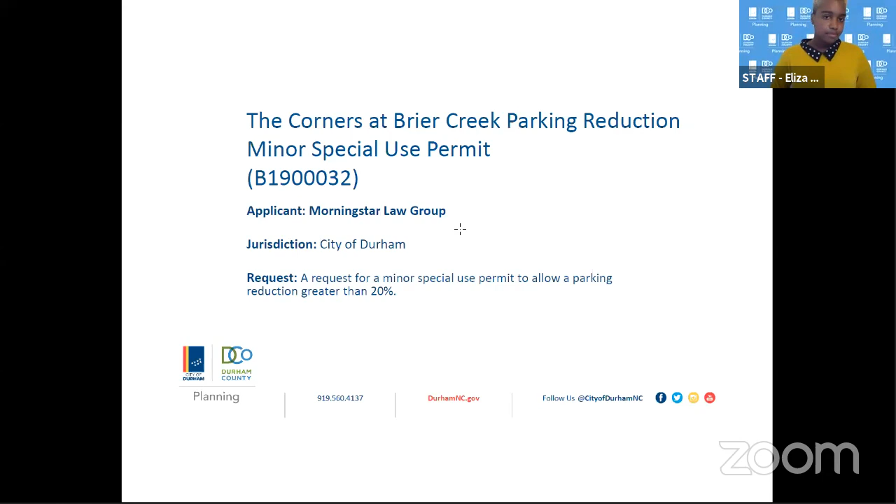Eliza Monroe representing the Planning Department here. Case B19-00032 is a minor special use permit request to permit a parking reduction greater than 20%. The applicant is Morningstar Law Group. The subject site is located at 1020 Andrews Chapel Road in Durham. The case area is highlighted in red.

The site is within the suburban tier, zoned planned development residential or PDR, located within the Falls of Neuse Jordan Lake Protected Area, Watershed Protection Overlay District, and the Major Transportation Corridor I-40 Overlay District. It is also within the city's jurisdiction and is on the screen there in red. The site area is currently vacant. The applicant is proposing a residential development there, primarily consisting of apartment units.

Per Unified Development Ordinance Section 10.3.1B.10, except for within the compact neighborhood tier, reductions of more than 20% of required motor vehicle parking shall require the approval of a minor special use permit. The site is currently vacant, as I mentioned before. A site plan, which was in your packet as attachment 4, is currently under review and proposes 298 apartment units, a clubhouse, and pool. The uses were approved with the development plan in 2012, which is attachment 5 in your packet. The Unified Development Ordinance would require the site to have 658 spaces.

That would be 2 spaces per the 298 units, plus one space per 100 square feet of the clubhouse. The applicant is requesting a reduction from those 658 spaces for a total of 527 motor vehicle spaces. UDO Section 3.9.8A and B establishes 4 findings and 13 review factors that the applicant must meet in order for the board to grant a use permit. These findings and review factors are identified in the staff report, and the applicant's responses are identified within the application, both of which are within your packet, and staff will be available for any questions as needed during the hearing process.

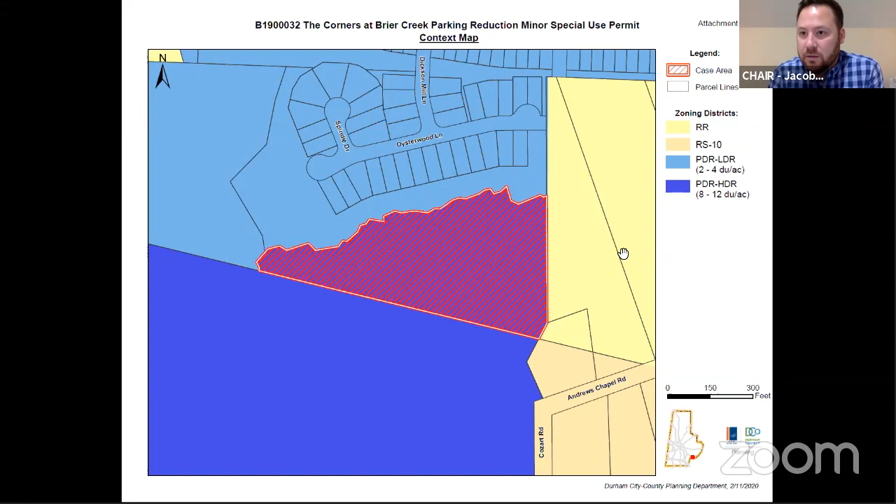Any other questions for staff, for Eliza? All right. I would usually say would the applicant come forward, but before the applicant starts, I want to administer the oath to everyone who will be speaking for this case. So who is the applicant? Is it Morningstar? Morningstar Law Group, and I believe they do have some additional people on their team today that will also be needing to take that oath. Okay. Neil, I think I saw you on the roster. Are you there?

Patrick, right? Neil, Patrick. I can hear some whispers, but I'm not sure if that's us or not. You've got Mike, Tonti, and Chad Boyette. We're like, I can wave.

All righty. Okay, well, this is going to be for all the speakers for this case. Do you solemnly swear or affirm that your testimony and evidence shall be the truth, the whole truth, and nothing but the truth? I do. I do. Thank you. All right, well, you may proceed if you'd like.

Chair, this is Krista Kugro with the City Attorney's Office. We also need to get verbal consent of the participants to the remote meeting format. I wrote that on the agenda here. I forgot to do that. So does the applicant consent to this remote meeting? Yes. Yes. Yes. Thank you. Well, please continue or start.

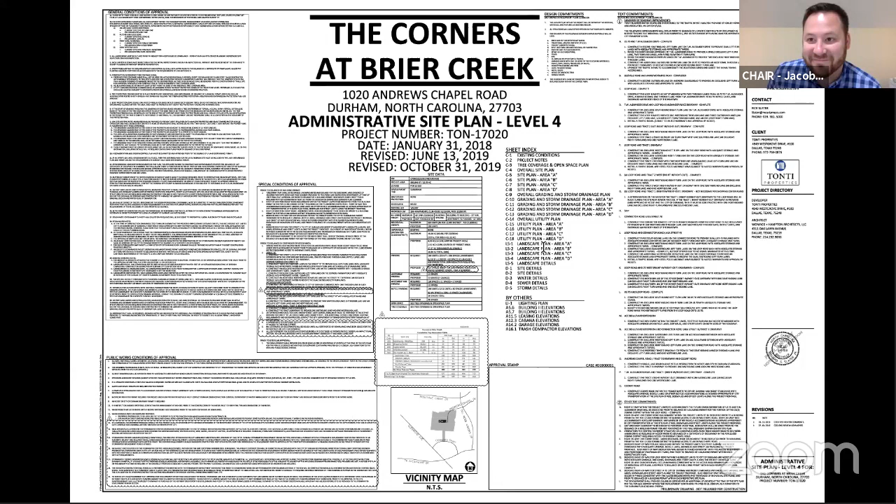Chair, this is Krista Kugro, City Attorney's Office. I believe Mr. Ghosh was not on the call when you administered the oath, and I'm not sure about the consent. So if we could just make sure that that was done. Thank you. All right. Mr. Ghosh, do you solemnly swear or affirm that your testimony and evidence shall be the truth, the whole truth, and nothing but the truth? I do. And do you consent to this remote meeting platform? Yes, I do. All right. Thank you. You can start.

Thank you, Chair Rogers and members of the Board of Adjustment. I am Neil Ghosh, an attorney at the Morningstar Law Group at 112 West Main Street in Durham. I am representing the owners of the property located at 1020 Andrews Chapel Road, and we will present evidence in support of the application for a parking reduction. The permit relates only to the parking reduction, not the proposed use itself, which is generally permitted at this location. So the evidence will be focused upon the impact of the reduction and not the more general aspects of the use. As staff mentioned, we are requesting a parking reduction of around 20%.

We believe the requested permit is warranted for the reasons which will be shown by the evidence that we will present to you today. And at this time, I would ask that all materials referred to or used by the witnesses, including the staff report and all of its exhibits, be entered into the record, and that judicial notice be taken with regard to the contents of the UDO, the comprehensive plan, and other adopted plans of the city and county of Durham. So noted. Thank you. In addition to those, we have some exhibits which we submitted to staff earlier. They are the reports of our expert witnesses.

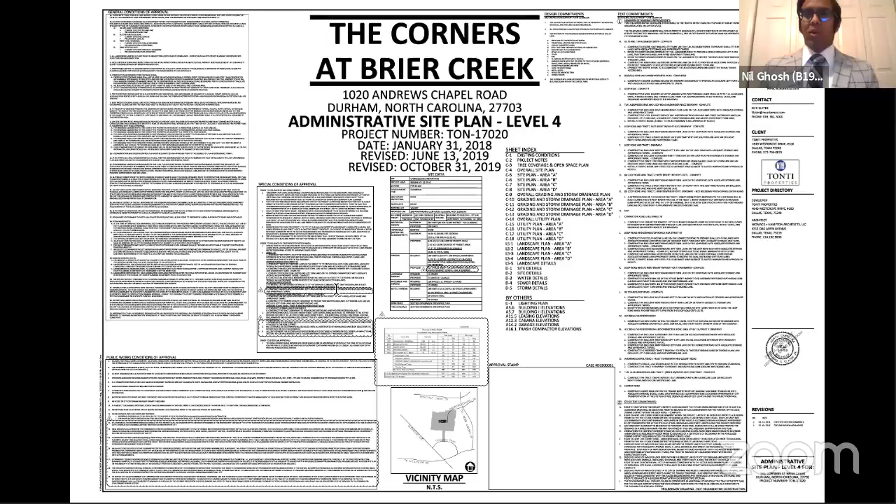One is from Mr. Jarvis Martin, who we are tendering as an expert witness in the field of real estate appraisal. He is a certified real estate appraiser with Stewart Martin McCoy. And the other report is a parking study, which was done by Mr. Earl Llewellyn at Kimley Horn and Associates, and he is a traffic engineer. I just wanted to make sure that those things would be entered into evidence and that those two witnesses would be accepted as expert witnesses capable of giving opinion testimony consistent with the requirement laid out in General Statute 160A-393(k). All right. You can proceed.

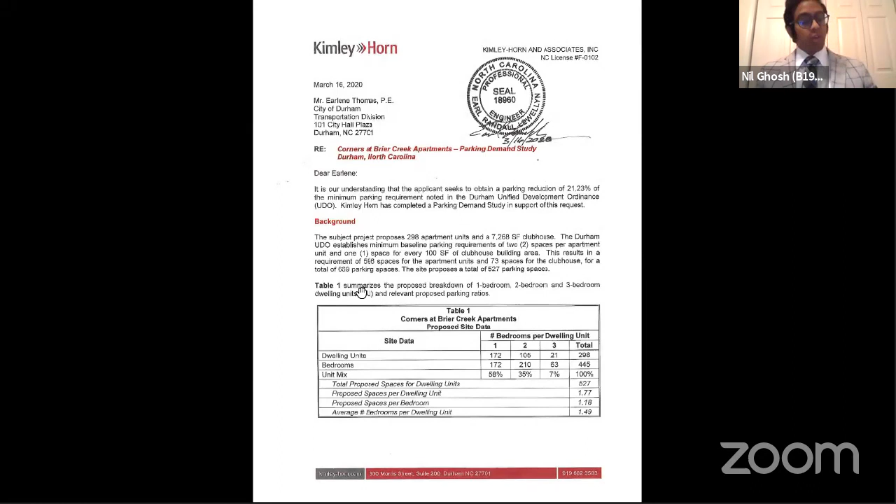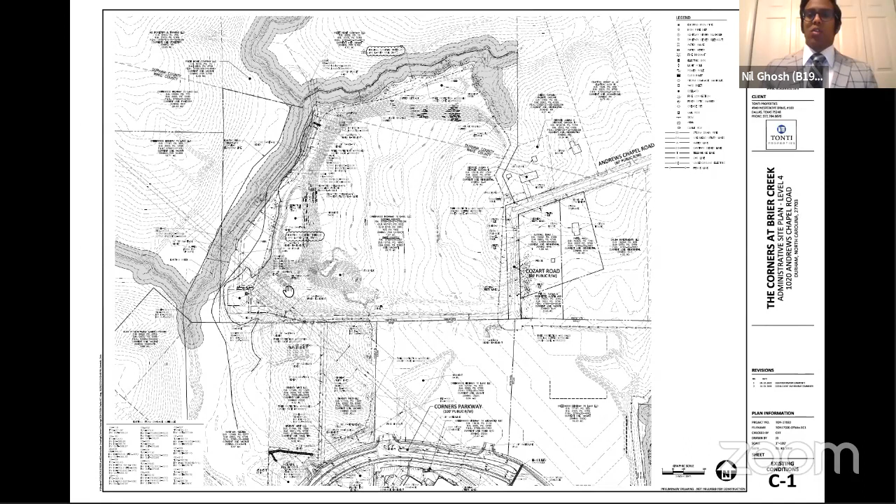Yes. Okay. So for me, the easiest way to describe the location is that it is behind the Harris Teeter at the corner of TW Alexander and Highway 70. The property is very much part of Brier Creek. There will be direct vehicular access to the Harris Teeter Shopping Center from the site. The development plan for this area included this use. It was approved in 2012, which I believe Eliza mentioned earlier. We're excited to see this section of the project finally being built out, and we're requesting your approval of a minor special use permit for a parking reduction for that purpose. Our first witness will be Mr. Earl Llewellyn.

Good morning, everyone. I am Earl Llewellyn, traffic engineer with Kimley Horn and Associates at 300 Morris Street in Durham. I routinely conduct traffic impact and parking analyses like these, as well as overseeing roadway designs, traffic signal designs, and the like. I graduated from NC State with a BS in civil engineering. I'm a registered professional engineer in North Carolina and have worked in the traffic engineering field for over 30 years.

As Neil said, I conducted the parking study for the project, which uses current industry standards, parking methodologies, et cetera. And that study has been entered into the record by Neil. My report assumes the development will consist of 298 mid-rise apartment units. That's basically between 3 and 10 stories, as well as a clubhouse of 7,268 square feet. Since completion of the study, the clubhouse has reduced to 6,218 square feet.

So based on that site plan, the UDO would require 658 parking spaces. The applicant is providing 527, which is approximately a 20% reduction. Based on information provided by the applicant, my report examines parking demand using 2 independent variables. Those are one, the number of units, and number two, the total number of bedrooms proposed.

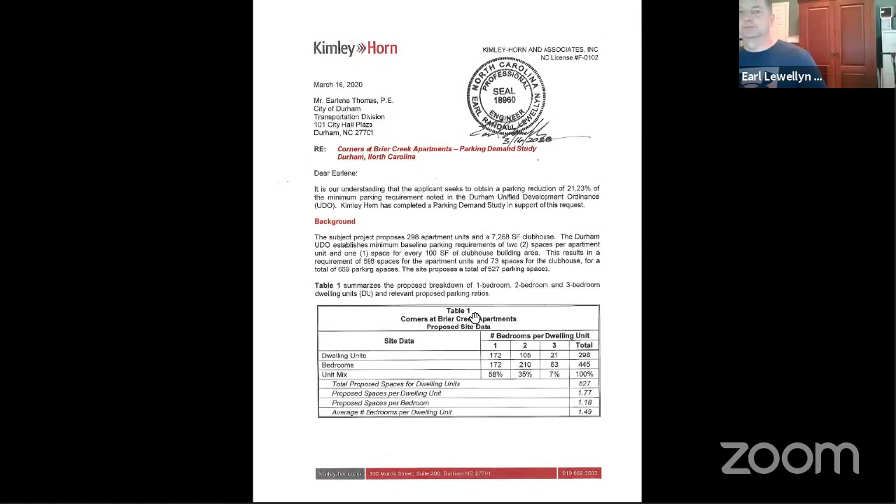Any other questions for Mr. Llewellyn? Thank you, sir. Thank you all. Thank you, Earl, and our next witness will be Mr. Jarvis Martin. Good morning, Mr. Rogers and members of the Board of Adjustment.

My name is Jarvis Martin. I'm a state certified general appraiser. I have 2 degrees from North Carolina Central University in business, and I've been in the real estate business here in Durham for over 40 years. I'll be glad to answer any other questions that you may have about my qualifications or resume. My firm was requested by the applicant to look at this property to see if there would be any adverse impact from this parking reduction on the surrounding or nearby properties.

Since this development would be adjacent to an existing shopping center, what we did was to look at 3 apartment complexes that had been approved with reduced parking that were in close proximity to commercial facilities, as well as look at shopping center facilities that have not been impacted by apartments with reduced parking requirements.

With commercial property, the best way to gauge value is by looking at the rental rates and vacancy. In the 3 shopping centers that we looked at that were not impacted by close by apartments with reduced parking, we determined that the rental rate for their space ranged from $25 up to $36.50 per square foot. When we looked at centers that were in close proximity to the 3 developments that did have some reduction in parking, the rental rates in those centers also ranged from $25 up to $32 per square foot.

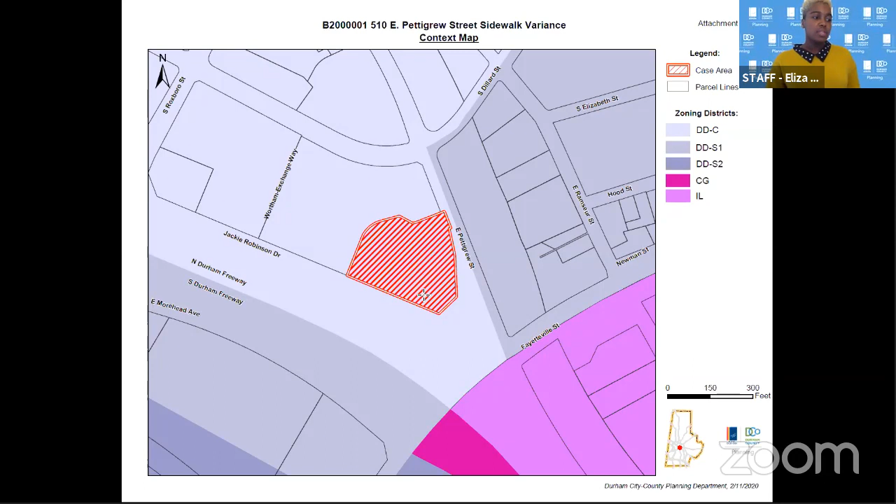Case B2000001 is a request for a variance from the sidewalk requirements of the Downtown Design Core Zoning District. The applicant is Cline Design Associates. The subject site is located at 510 East Pettigrew Street. The case area is highlighted on the screen in red. This site, as I mentioned before, is in the downtown tier, zoned DDC, and is within the City of Durham's jurisdiction. The site is currently vacant.

Per UDO section 16.4.2A.1, within this DDC zoning district, sidewalks shall be provided from the building face to the back of curb. For this site and the approved location of the building, that will result in sidewalk widths within the range of 27 to 34 feet wide along Wooden Exchange Lane and a roughly 40-foot sidewalk along East Pettigrew Street. The site is currently vacant, but a site plan was approved in October of 2019, case D1900079, to permit the construction of the apartments here.

The applicant is requesting a variance from section 16.4.2A.1 of the UDO to instead permit a 12-foot sidewalk around the site at the back of curb to contribute to a visual environment downtown. Additional landscaping would be provided between the building and the sidewalk. UDO section 3.14.8 establishes 4 findings that the applicant must make in order for the board to grant a variance. These findings are identified in the staff report, and the applicant's responses to the findings are identified in the application, which are both within the packet that you all received. Staff will be available for any questions as needed during the hearing process.

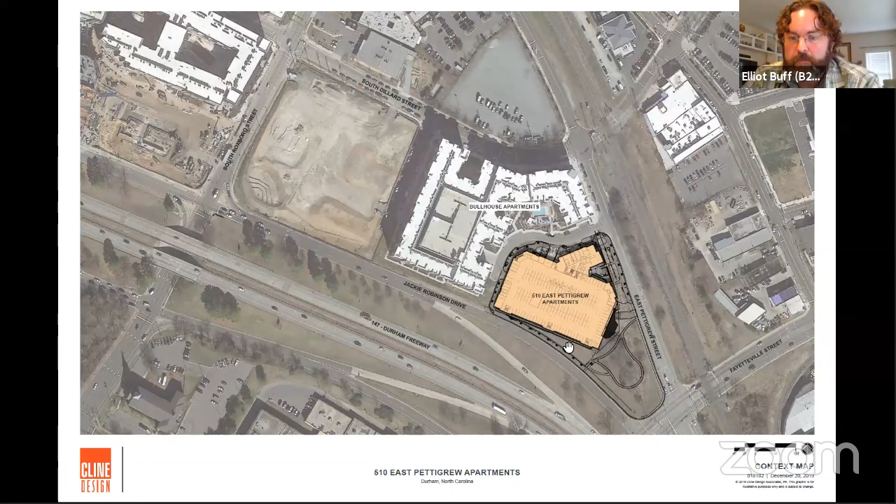One more question, sir. Where is the front entrance of the building? The front entrance is really along East Pettigrew Street. Liza, if you could flip to probably the second exhibit of the proposed condition, or even the code condition, that's fine as well. The corner of Wooden Exchange Lane and East Pettigrew is the front corner of the building. And there's a main entry, sort of where you see that rectangular planter near the front corner of the building. That's really the front door. Okay.

Thank you. Any other questions for the applicant? Mr. Buff, would you like all of your written and oral testimony to be part of the record? I assume normally, yes, I would like that. In exhibits, and it's just something we have to put on the record. I appreciate that. Any other questions for the applicant? All right. Eliza, you went, there you go.

Hi, this is Rexless. Mr. Buff, the trees, are there going to be any planters around these trees or kind of obstructions? Is the sidewalk going to be flush so people aren't tripping over these areas? The sidewalk is a continuous flush sidewalk, and the tree plantings are flush tree grate pavers with bricks on top too. So you have a continuous flush surface there at the sidewalk, and that's a Durham approved standard streetscape. Great, thank you.

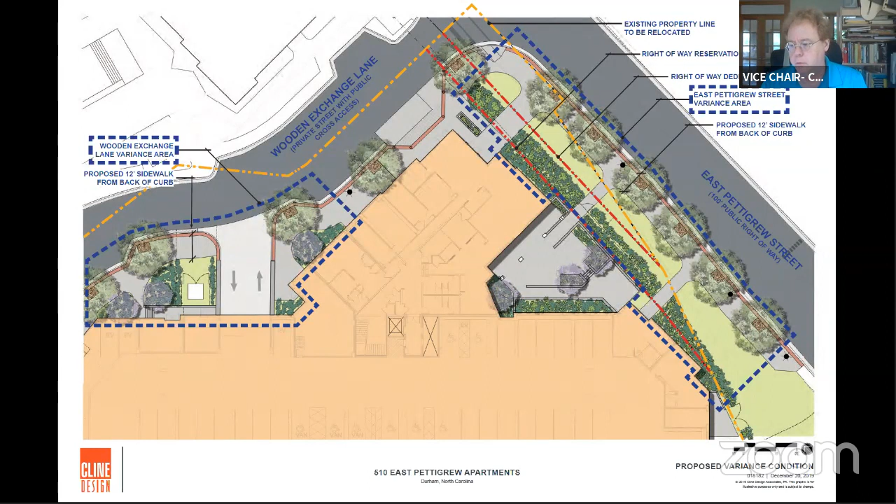Mr. Chair, this is Meadows. I have a question. I assume that the city will be maintaining the area that's inside the dedicated right-of-way, or there's some sort of agreement between the city and the applicant about maintenance of the vegetation in the right-of-way. Wasn't sure about that. Good question. Eliza, do you have an answer, or does the applicant?

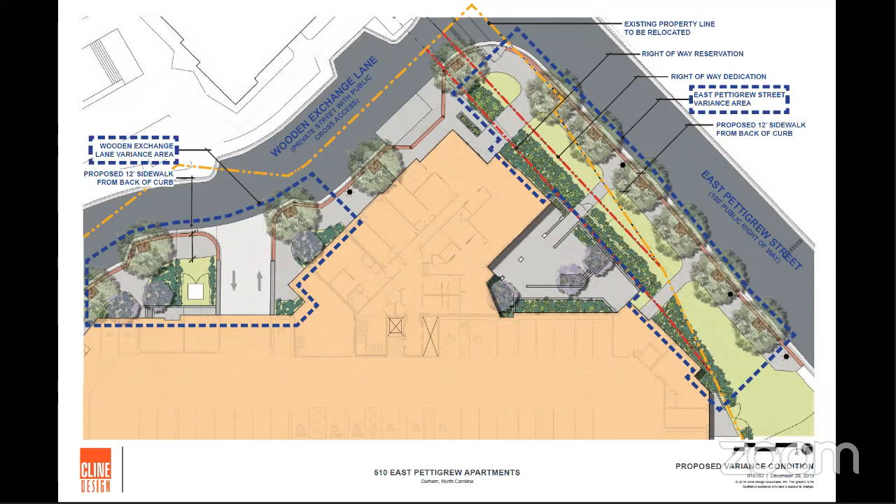I do not have an answer at this time because this is not something that has been formally submitted to the city of Durham in terms of this request to change over. For the right-of-way maintenance, I do believe that is within our general services department, and I'm looking at Jessica and Bo to correct me if I'm wrong. I'm not aware at this time of any partnerships or agreements between us and Go Triangle for the area that is the right-of-way reservation. This is Jessica Dockery, Planning Department. The city does maintain the right-of-way. Thank you, Jessica.

Any other discussion? I kind of like the area with less impervious surfaces, such as this. Something a little more creative, I would think. So those are my thoughts. All right. Was anyone having a motion? Oops. I believe there was a raised hand by DeLacy. Oh, I'm sorry, Mr. Lacey.

You may be on mute. You are on mute. Hang on.

Okay. I agree with your joy at less impervious surface, but I was thinking about how crowded the sidewalks are when it comes down the street toward the ballpark and the DPAC, and how people just flood that whole sidewalk. And I was just musing as to whether they would continue to spill out on sidewalks further away than that, or are people no longer interested in walking that far? That was my only musing. It's not an objection, it's just a thought.

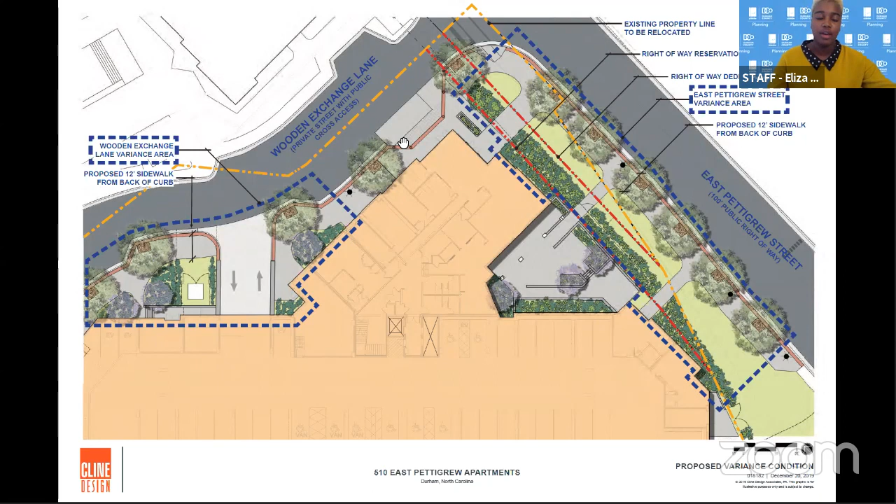Well, I was wondering, and I don't think I saw this, the number of units in this. Eliza, do you happen to know how many units are in this? I can pull up the exact site plan. Elliot, I might default to you here. The number of units wasn't a part of the variance request, so that information wasn't required. But I can pull it up very quickly. So let me go back on mute. And Elliot, if you have the number of units for the original site plan. I wish I did. I don't have that number in front of me. It's okay. And for me, all the number of units blur together anyway. But Eliza, if you do pull that up, just so we can formally acknowledge that.

But to acknowledge the sidewalk comment, I think our goal was to still provide a 12-foot sidewalk, which is consistent with Durham standards and with a very large, clear pedestrian pathway of 12-foot width. And that's 12 foot of paving with the tree planters along the streetscape edge, along the back of the curb. Those are still hardscaped tree planters with brick paving above. So you have a clear pedestrian route throughout that entire streetscape area.

All right. Any other comments, discussion among the board? All right. We're not getting a staff recommendation for this variance. Is there a motion? I'll do it. This is Meadows. Hold on. This is Jessica Dockery. I believe you're holding for that site plan number. Eliza was still trying to find that. Yes, and unfortunately, I'm not able to locate the SharePoint file for it, so I do apologize. I'm not able to pull up that exact number. Okay, again, like you said, it's not part of this variance, it was just a simple question, but I appreciate you looking. Mr. Meadows, I think you were.

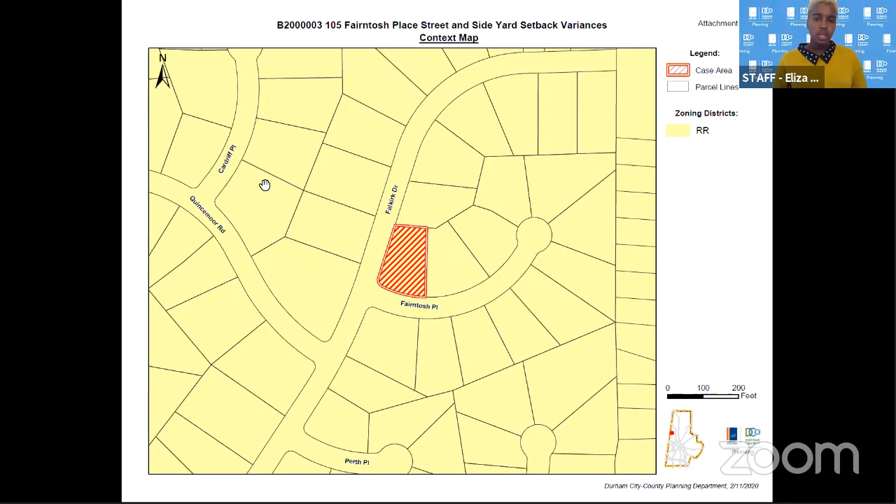Case B2000003 is a request for a variance from the required street and side yard setbacks in order to construct an addition onto an existing single family dwelling. The applicants and property owners are Kelly and Camille Drews. The subject site is located at 105 Fairntosh Place. The case site area is highlighted in red. The site is in the suburban tier, zoned residential rural, otherwise known as RR, located within the Eno River Protected Area Watershed Protection Overlay District and within the county's jurisdiction. The site area is currently a single family dwelling.

Per UDO section 6.2.1A.1, a 50-foot street and a minimum 12-foot side yard setback are required for a single family dwelling in the RR zoning district. The case area is a corner lot and thus has 2 street yards, one on Fairntosh Place and one on Falkirk Drive.

The applicant is requesting a 12-foot variance from the street yard setback along the west side of the parcel in order to bring the existing structure into compliance with the current ordinance. The survey, which was attachment 4 within the packet and is on the screen here, illustrates that the existing dwelling is 38.6 feet from the property line, encroaching into that required street yard.

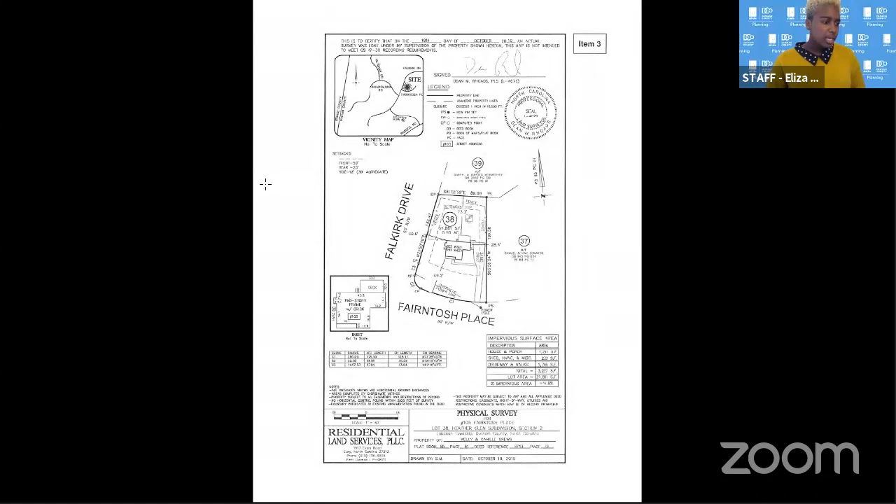The applicant is also requesting a variance from the required side yard setback for the addition of a garage, which is shown on attachment 1. As proposed, the addition would encroach into the required side yard setback and requires a variance from the Board of Adjustments for approval. UDO section 3.14.8 establishes the 4 findings that the applicant must make in order for the board to grant a variance.

These findings requiring approval are identified in the staff report, and the applicant's responses to these findings are identified in the application. Both were within the packet that you all received. Staff will be available for any questions as needed during the hearing process, and I will also be able to flip through the different documents here, which you should have gotten a copy of, but I'll also have here for the view. And I do believe someone does have their hand raised.

Mr. Meadows? Thank you. Eliza, would you show item 2 on the screen just for a moment, please? This is the one that you're referring to, right? That would be the one. Thank you. I just wanted to make sure that that was on the screen for a period of time. Thank you. And if there are no further questions for staff, I will allow Mr. Drews, or Mr. and Mrs. Drews, to speak. Are there any questions for staff before we continue? All right, with the applicant.

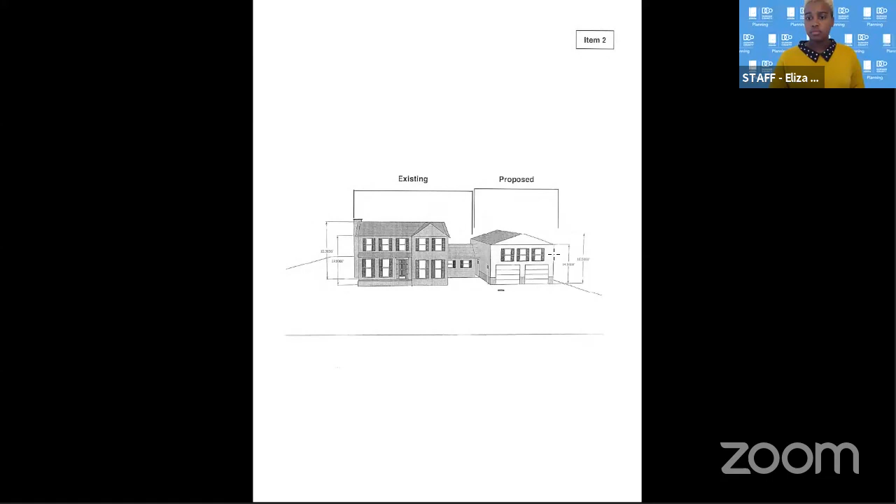Hi, I'm Kelly Drews. I'm one of the property owners along with my wife, and I'll be representing the 2 of us for today's meeting. As Eliza mentioned, essentially we're asking for 2 variances. One, Mr. Drews, for one moment, I appreciate you coming. I got to administer the oath and ask you a question. Do you solemnly swear or affirm that your testimony and evidence shall be the truth, the whole truth, and nothing but the truth? I do. And do you consent to using this remote platform? I do. Thank you. Please continue.

Sorry. So essentially we're asking for 2 variances, one of which is to bring our current structure into conformity. It was built in 1977 before any of these guidelines were established, and as such, we'd like to just make sure it's in conformity with the current guidelines. And then we'd like to request a variance from the setback requirements in order to build an attached garage. We're hoping to build a garage that's roughly 24 feet wide and would therefore be between 4 feet and roughly 1 foot from the property line, depending on where on the garage you're measuring.

And Mr. Drews, would you like all of your written and oral testimony to be part of the record? Yep, that's fine. Any questions for the applicant? Meadows has his hand raised. Chair Rogers. Mr. Meadows. Thank you, sir. Mr. Drews, I had a question for you about the roof of the proposed structure. If I read the site plans correctly, it looked like the wall of the structure was going to be about a foot or so from the lot line.

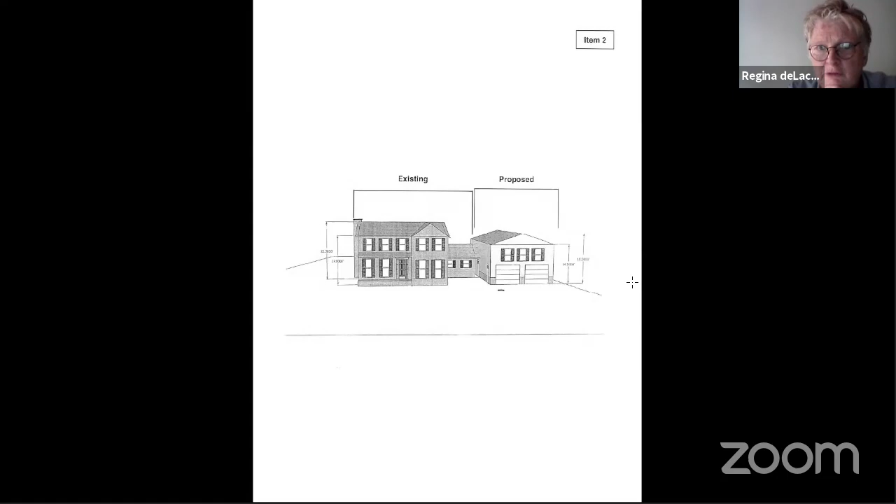Lacey? Mr. Lacey. Mr. Drews, have you been in communication about this project with your next door neighbor whose land you abut on the garage side? Yeah, we have actually. So that was the first person we talked to. We didn't want to create any bad blood. And they offered, in fact, to come and speak here, but we were told that they couldn't unless their testimony would just be the sake of their opinion. It wouldn't make any sort of difference on the decision.

So we have talked to them. They are for the garage. I think it would add value both to the property and the neighborhood as a whole. But again, since they were an appraiser, they couldn't state that. But yes, we have talked to them and they are okay with it. Thank you. Any other questions?

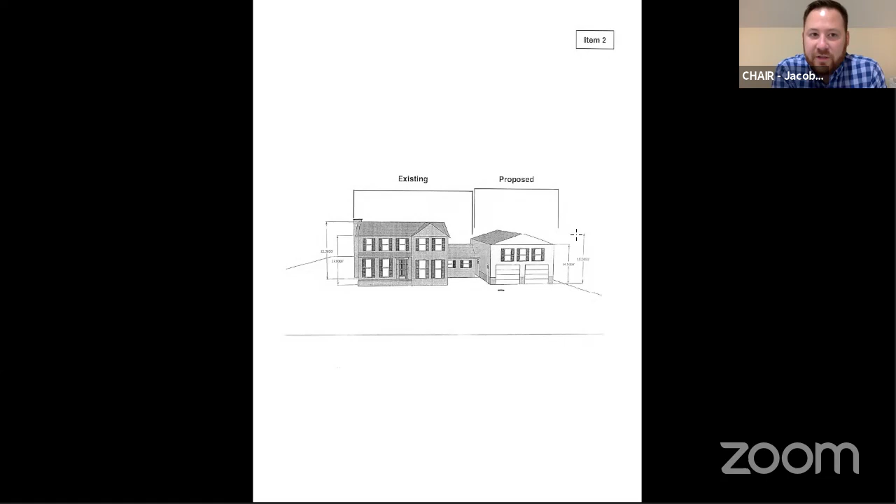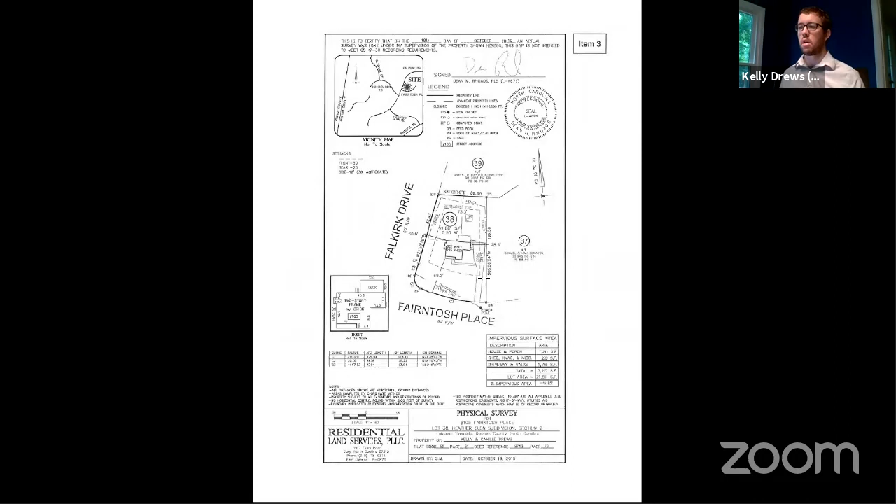Mr. Drews, where your proposed garage is, is there anything in that space currently? Yeah, so we have a concrete driveway in the space. It covers, I would say, probably 60% of the proposed area. If you look at, I don't know if you can see item 1, Eliza. Yeah, so if you look down at the bottom there, there's the existing concrete driveway, and you can see it sort of gets wider as it enters towards the proposed garage.

So there are some sections where the driveway is not currently there, but I would say at least 60% of it is taken up already by a concrete driveway, impervious surface already existing. But other than that, it's the only sort of open area in our property. Okay, thank you. Any other questions? Retchless. Mr. Retchless. Mr. Drews, that's a huge footprint of a garage. Are you going to use it for anything else? I notice you have windows and a second story.

Yeah. So essentially, when we were discussing with the planning department on how to go about this permit, we were told it's always better to ask for what you think could happen. And if you decide to go smaller, that's easier than asking for smaller and wanting more later. So what we were initially thinking was a 2-story garage, but I believe we're going to settle actually on a 1-story. It's only going to be used for a garage and a workshop space. We like to do a lot of renovations and such, and so we need a place for our tools, but nothing else beyond that. No business purposes or anything like that.

So am I to understand you said a single story or? Yeah, so essentially when we applied for this, obviously with coronavirus, it was many months ago. And so we hadn't settled yet on the 1 versus 2-story. You're still getting quotes and so on. We think we're going to end up doing a 1-story just for financial reasons, and it would probably just make things a lot easier all the way around. But at that point, we'd already submitted the paperwork and it had been settled.

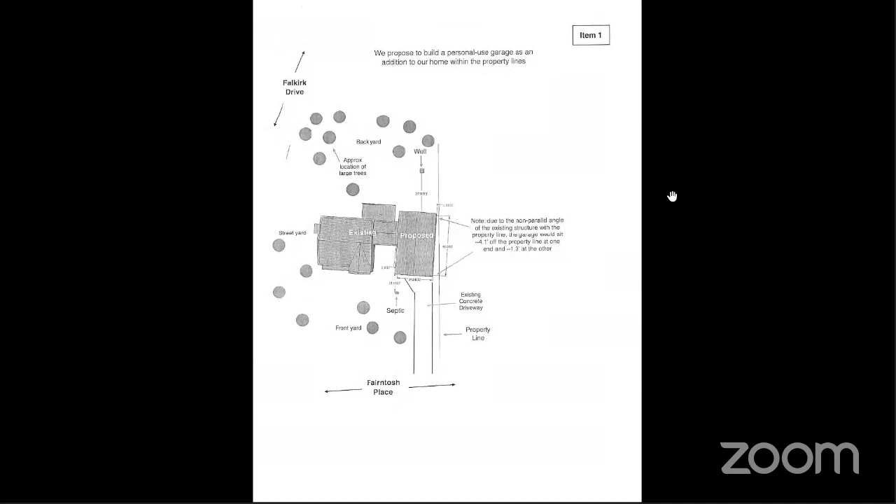Eliza Monroe, Planning Department here. I know this is usually the time for deliberation, but I thought I could provide a little bit more context, if that is okay with the chair. Please do. From the meetings we had with the applicant, the reasoning behind the garage being there is because of the existing concrete driveway. In addition, there's also the well towards the back of the lot and some substantially large trees, which you can kind of see here in the aerial. So based upon that, the location was decided upon there.

Staff would like to note that in the midst of all the other things that were happening, we were not aware that there was a slight change in the design. There has been that change that was mentioned by the applicant, Mr. Drews, but the variance request is still for the setbacks. So I don't know if the height or the setbacks is the concern. I just wanted to chime in and provide that additional context for the location, as well as why you have the certain things here today.

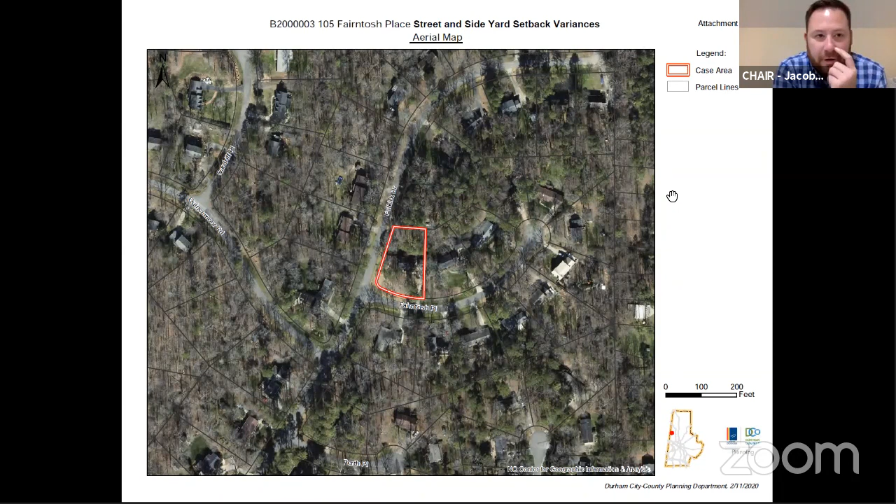Eliza, I'm glad you brought that up. Can you pan back to, yes, that image. I was looking at this earlier: one, you've got that septic in the front and then the well in the back. It doesn't appear you can position it much differently.

And just to provide more color on everyone's comments, that's essentially what we were saying when we had these initial design meetings with the planning department: here's our property, here's where the open space is, and here's why we think we should put it here as opposed to somewhere else. The well requirements mean that we couldn't put it too much farther back. The ordinance that I found was 25 feet from the well. The septic being in front sort of locks it in there. And unfortunately, the topography of our land means we can't really put it on the other side. It would be even closer to the street.

As for the design change, again, I apologize for the potential change here. Obviously, the circumstances with the coronavirus make things a little weird, but we are planning on having it a smaller structure overall due to it being one story. I couldn't bring it up in the time frame we had, but that is the goal. Our thinking was that essentially the variance is for a setback from the property line. The overall width and length would still be the same regardless of the height, and so the variance would still require the same hearing, which is why we didn't rush to change anything before the hearing.

Yeah, I'm not really concerned about the height, because the footprint would still be the same. Do you have something, Eliza? There is a hand raised. The first hand that I saw was Bryan Wardell. Mr. Wardell, how are you?

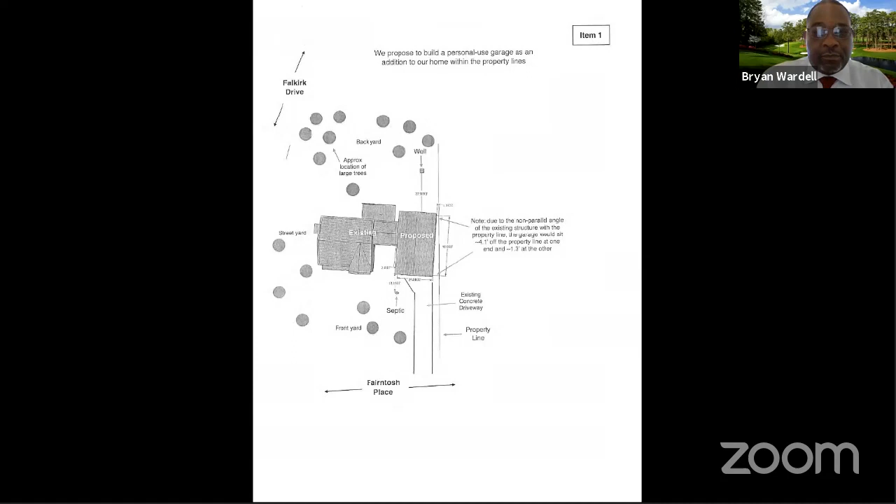And then who was the other person who had a comment? Wymore had her hand raised as well. Tisha, Ms. Wymore. Just really quick, I actually have a question for the applicant, and I'm sorry that we're already past that point, but it just occurred to me. On this proposed garage, the wall facing the neighbor, would there be windows on that side of the structure? We weren't anticipating putting any windows on that side, just leaving it as privacy for the neighbor. If that requires a change, we can obviously look at the design and put in windows, but that was not the plan.

As for the hardship comments, I don't know if I'm supposed to be addressing all comments being made at the moment, but essentially, due to the topography of the land, placing it on the left side both puts it closer to the street yard and makes it harder due to the slope. And due to the well and septic, it's difficult to move it forward or backwards in any direction. And the fact that there's already a concrete driveway over the vast majority of the space means it made sense to put a structure over that.

Does anyone, any other thoughts? DeLacy? Mr. Lacy? I was wondering if the applicant had considered moving the garage closer to the septic, or is there a distance that has to be maintained between the septic and any construction?

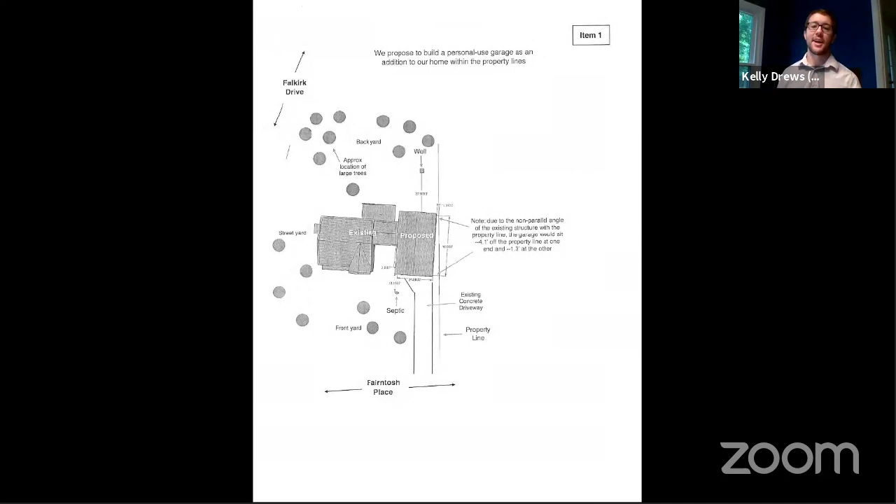DeLacy, so I see you didn't want to say, here's a garage and there's a house attached to it? Right, exactly. We wanted to have a house with attached garage, not garage you go first, and then there's a house if you want it. Thank you.

Very good question. You know, one of the things I'm thinking about, if this really affected anybody, it's that adjacent property owner, and it sounds like notice has been given to them, and the applicant has also talked to them. While they're not here to show their support, it sounds like they're very well aware of what this would look like. So my concerns about that lot line are eased because of that.

We can't determine, you know, they could sell their house tomorrow, or it could be 30 or 40 years from now, and that really has no impact in my mind on our decision, I don't think, because we have to go with what's current. They aren't here, and so that's just what I'm thinking about that. Any thoughts from anyone else?

All right. Does anyone want to make a motion? Does anybody want to talk about concerns further? Mr. Retchless.

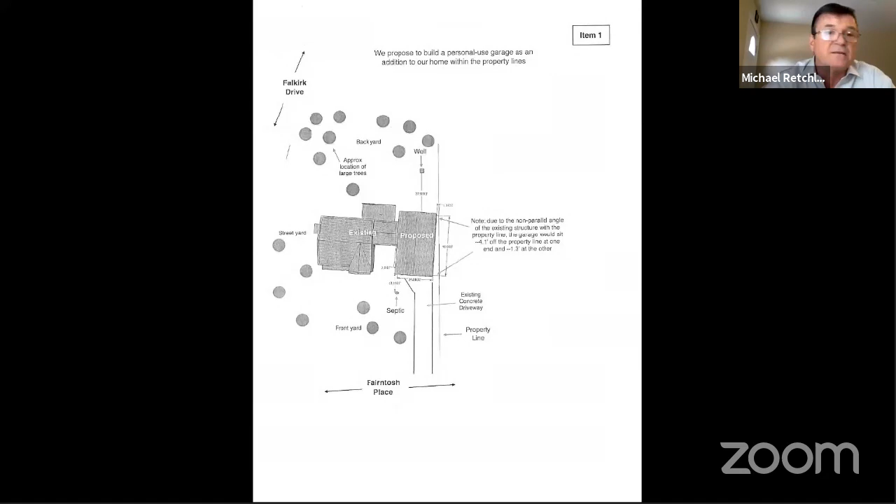Anyone else? I am also concerned with the size of the structure, not necessarily its placement, rather its length. It's 40 feet deep. The corner that is closest to the lot line is the one that gives me the most pause. I wonder if a less deep structure might be easier to accommodate. It might still need a variance, but perhaps the variance would be less than the variance necessary for this structure.

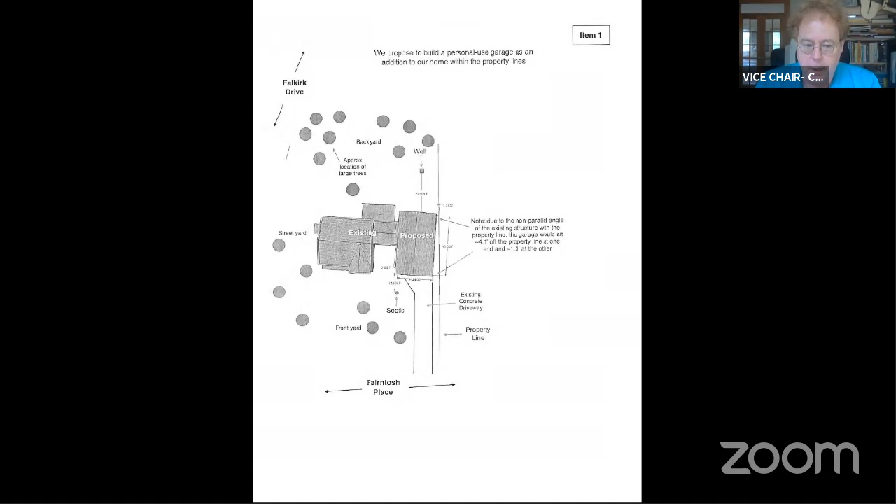Alternatively, and it's not my job to design this site, but I wonder if there's some way that it might move closer to the existing house, again, as a means of attempting to minimize that side yard setback variance. And by the way, I do appreciate them coming in and trying to get the house quote unquote legal with respect to the street setback. I do appreciate that, but I don't feel as though this proposal minimizes the variance request in ways that could potentially be done, and would love to see a modified design to address some of those concerns.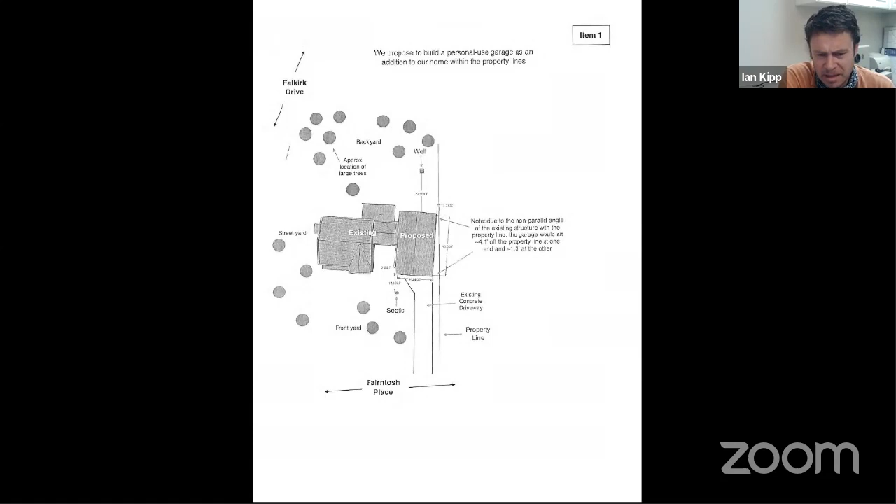May I say something? I'm not sure who said that. Ian. Oh, Mr. Kipp, please do. Yes. Okay. So I'm not crazy about the design or the fact that it's just a couple of feet from the side yard, but the neighboring house is quite a ways away. And that would really be the only person bothered. And the applicant said that they're not bothered by it.

So sure, the house may trade later, but the future neighbor doesn't have to buy the house if they can't stand the fact that the garage is effectively on their lot line. So I know this is in the RR zoning, it's suburban tier, but as an urbanist, I don't really have a problem with it. So that's just my opinion. I have a question. Am I allowed to provide additional color at this point, or are we beyond that stage? Go ahead. Sorry.

So there's been a lot of discussion about the neighbor and their thoughts on it, and I'm here to testify that we get questions daily about when we're going to start construction, because they're very interested in seeing it go up, in the sense that they have no problem with it. It is a good point that the neighboring house is quite a distance away. We actually have a row of trees and bushes in between them existing that wouldn't be disturbed by this garage. And we also have a fence in the backyard that wouldn't be disturbed by the garage.

So when we were designing this, we had just moved to the neighborhood, and we didn't want to upset all of our neighbors. But as was mentioned, there's no one else that would be affected. And the reason for the design itself, in terms of the width, is that we were going for a 2-car garage. Standard 2-car garage is anywhere from 22 to 24 feet, and everything we read about designing garages says that if you can get the 24 feet, definitely go for it, so you don't have your car doors hitting things on the sides. So that was the reason for the 24-foot width of the garage. Just to give some color as to the reasoning behind our decisions.

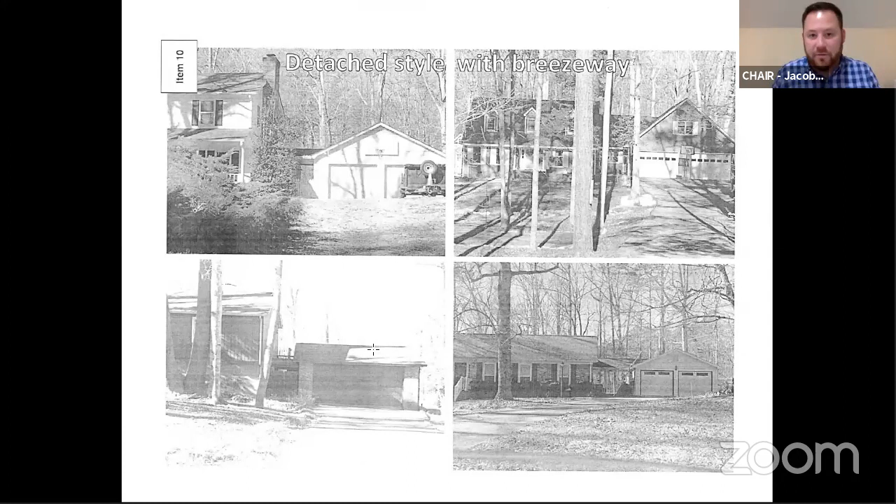Well, property pictures of it right now? I could pull one up, I suppose. Well, what I was thinking is pictures of your property and the topography; I think that would help. Is there a motion to continue the case, or does anybody else have any thoughts? Any board members?

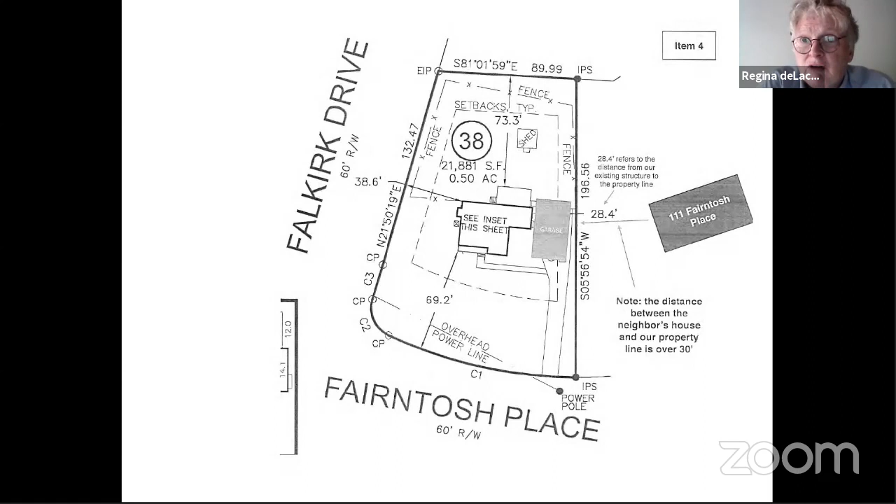DeLacy. With the applicant's consent, I move to continue this case until such time as the applicant comes back with something more in keeping with the UDO. Yeah, or more evidence. Eliza or Jessica, could this be put on next week's agenda? Bryan Wardell is raising his hand, so I'm going to let him chime in with the language of that motion, because I do think a motion was introduced. So, Bryan.

Right. So any motion to continue would have to be to a date certain, since the hearing has already been opened. The date certain could be the 30th. However, I would personally feel more comfortable with at least 30 days because of notice requirements and so forth, and getting it back on the agenda. So I would say that it would be more appropriate to set it for the next 30-day hearing. So my advice would be, if you are going to continue it, to whatever the next scheduled 30-day agenda would be.

Staff, Eliza Monroe, Planning Department. The next meeting would be July 21st. That one, if staff would like to provide any context, I think it's the 28th. Or, yeah, excuse me, the 28th. That one has not yet been advertised. The meeting after that, to give more context, would be the fourth Tuesday in August, which is August the 25th.

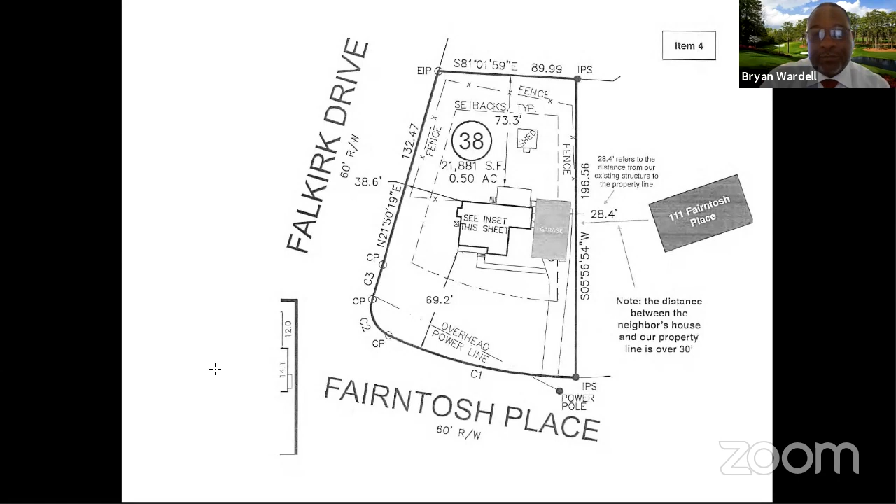And just a recommendation for Mr. Drews, I would probably think about options for some alternate designs as well, but I think staff can probably help you with that more than anyone else. Okay. All right. Well, we've got a motion to continue this case until July 28th. Is that right, Ms. deLacy? You're on mute. You're still muted. Okay, sorry. I withdraw my earlier motion and I move that we continue this case to the date certain of August 25th in order to give the applicant sufficient time to make modifications. I know a week is short, a month might be pushing it.

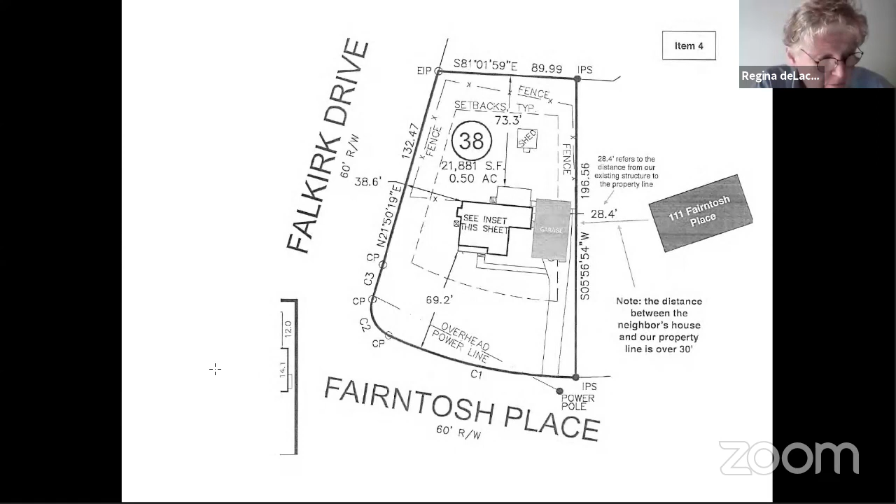Sorry, go ahead. I was just saying, if it's just for our benefit to have the August date, we would actually prefer July. I feel like we could turn it around in time. If it's a question of better scheduling or it has to be August for whatever reason on the council's end, then we understand. But if pushing it back until August would just be for our benefit, we prefer July. Okay. Then I'm withdrawing the second motion. I move that we continue this case to the date certain of July 28th. Is there a second? Rachel, second. All right, Madam Clerk, will you call the board?

Ms. Burnham, yes. Ms. deLacy, yes. Mr. Kipp, yes. Mr. Meadows, yes. Mr. Rogers, yes. Mr. Retchless, yes. Ms. Wymore, yes. Motion carries 7-0. All right, Mr. Drews, we will continue your case and we'll rehear it on July 28th. Appreciate your time this morning. Thank you. Madam Clerk, will you call the next case?

B2000005, a request for a variance from the 10-foot no-build setback requirement for the construction of an addition onto an existing single-family dwelling. The subject site is located at 21 Copper Hill Court, is zoned planned development residential, and is in the Falls of the Neuse Jordan Lake protected area in the suburban tier. The case has been advertised for the required period of time, and the property owners within 600 feet have been notified. Notarized affidavits verifying the sign postings and the letter mailings are on file.

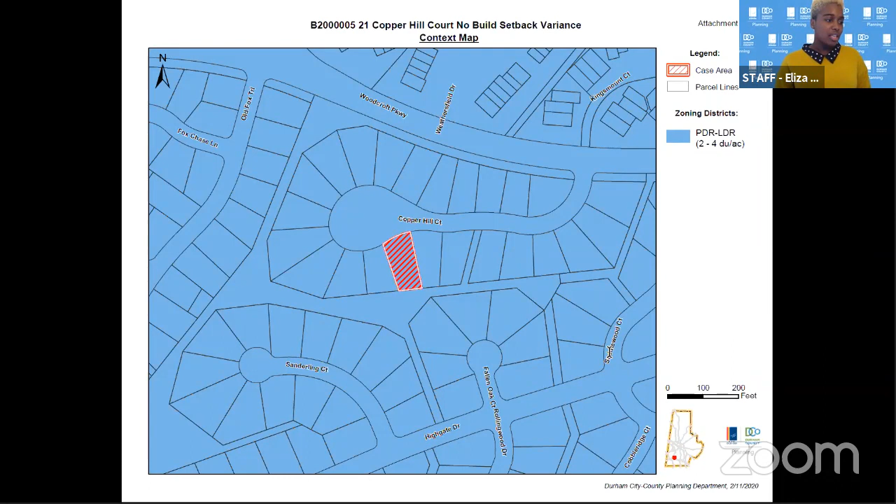The site is in the suburban tier, zoned planned development residential or PDR, located within the Falls of Neuse Jordan Lake Protected Area Watershed Protection Overlay District, and is within the city's jurisdiction. On the site is currently an existing single-family dwelling. The applicant requests a variance from Unified Development Ordinance Section 8.5.9C, which requires that buildings and other features that require grading construction shall be set back at least 10 feet from the edge of a riparian buffer, henceforth referred to as the no-build setback. To the rear of the lot is an intermittent stream, as shown on the screen here, which requires a 50-foot buffer on either side of the bank per UDO Section 8.5.4B1. An additional 10-foot no-build setback is also required for the stream buffers per UDO Section 8.5.9C.

The plan provided by the applicant showing the existing single-family home and the proposed addition indicates that the addition will encroach completely within the 10-foot no-build. Lastly, the subject site is located within the Falls of Neuse Jordan Lake Protected Area Watershed Protection Overlay District and is subject to impervious surface limitations. The request does not exceed the impervious surface limits since the property receives a credit for impervious surface constructed prior to 1994. And the request for the addition is less than 24% of the maximum impervious surface total allowed for the parcel per UDO Section 8.7.2B.

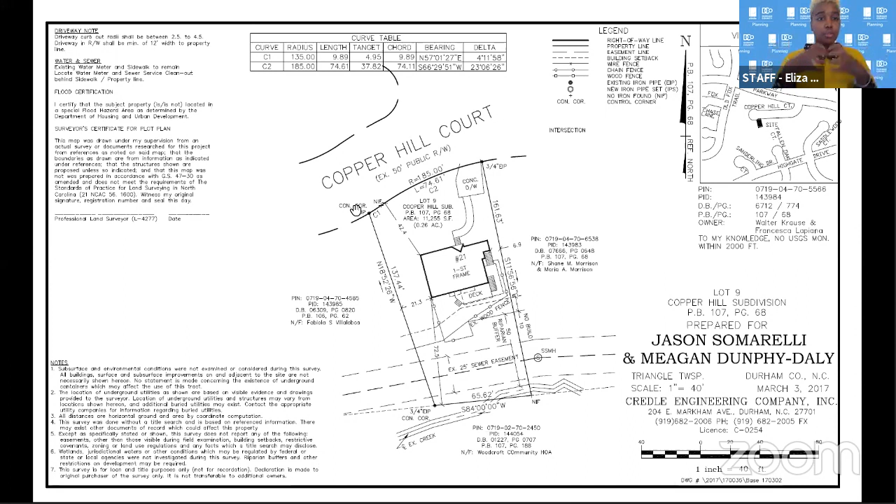UDO Section 3.14.8 establishes 4 findings that the applicant must make in order for the board to grant a variance. These findings requiring approval are identified in the staff report, and the applicant's responses to the findings are identified in the application. Both are within your packet. Staff will be available for any questions throughout the hearing process. Megan brought to my attention this morning that there might have been some issues with the compressing of the file. So I don't know if everyone was able to see the red box that noted where the addition will be located. I'm not sure if everyone can see where my mouse is moving on the screen. I see some heads nodding yes. The addition would stop directly at this line here, which is in line with the 10-foot no-build setback, which is set back 10 feet from the 50-foot riparian buffer. And I'm open for any questions.

Any questions for Eliza? This is Chad. Thank you, Eliza, for clarifying. That was going to be my first question, I couldn't tell where on the site the addition was proposed. The imaginary red box that you drew on the screen, does that go for the entire rear elevation or only a portion of the rear elevation? It will go for the entire rear elevation. I'm going to quickly go to the rear elevation, which is one of the very last portions of the PDF. Don't want to give anyone a headache, so I apologize for going through this so quickly. I believe this is the proposed rear elevation, and this here is kind of the floor plan layout for it. So the entire rear elevation will be across that 10-foot no-build in the back side of the property.

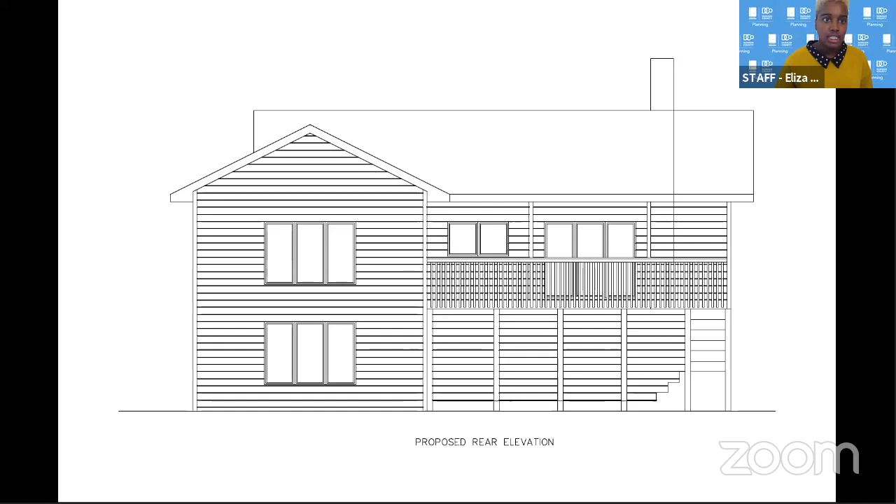Any other questions for Eliza? I'm trying to monitor raised hands. So if I don't see your hand... oh, I think there is Ms. DeLacy. Yes. Eliza, are you saying that it's going to go into the no build setback, but not the riparian setback? That is correct. It will go just to the no build setback.

If it was to go into the riparian with the state required 50-foot riparian buffer, the applicant would be required to provide mitigation. So in an effort to stay out of that buffer, they are proposing to encroach within the city mandated and required 10-foot no build setback, but stay completely out of the riparian buffer. Okay, thank you very much. Eliza, I was mistaking the fence for the size of the building.

I heard someone else speak, so I apologize. I didn't see who that was. I apologize. It was me, Jessica Dockery. Would you please use the annotation tools and show a box roughly where this addition will be on this drawing? This I can do. I apologize in advance for any crooked lines. They are not to scale.

Sorry, it's not looking good so far, everybody. Eliza, it's Jessica again. You can use a box. Oh, I am learning something new every day today. I'm gonna undo and delete that. Can I turn this box? Having a little bit of an issue turning the box once it is drawn. I was not good at Pictionary as a child, but this is the gist.

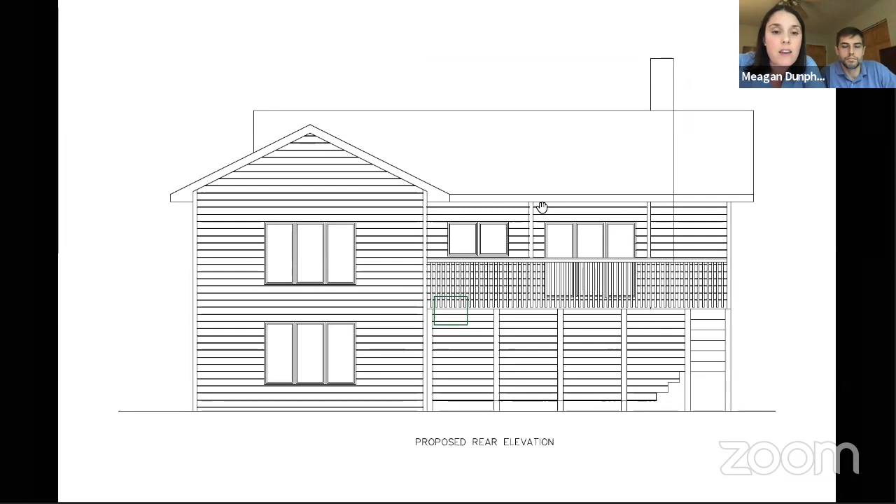Retchless has his hand raised. Mr. Retchless. Yes, you're not planning putting a deck off the back of that like you already have off the house, are you? No, we're not going to add any additional structure beyond what was shown on the rear elevation. And I just want to point out, as Eliza mentioned, we will fully encroach the 10-foot no build on one part of it, but because the stream is angled, we won't fully encroach in the 10 feet on the west end of the addition. Gotcha. Thank you.

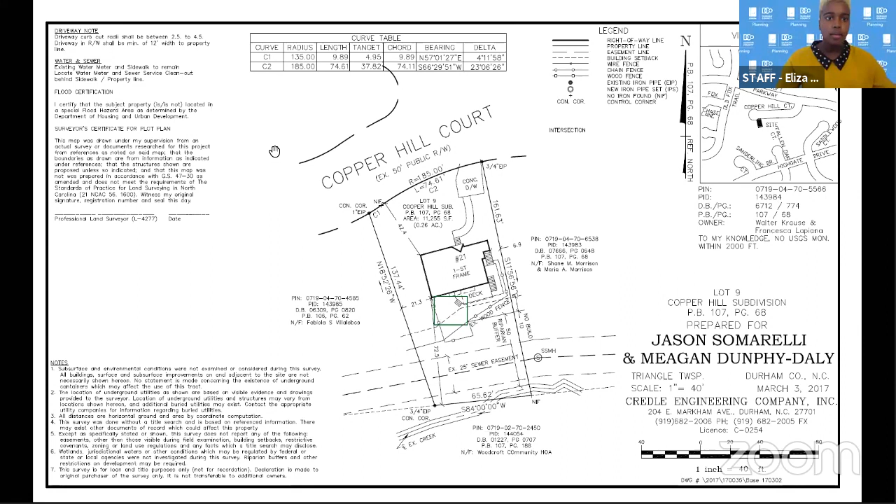Any other questions? Thoughts? All right. Mr. Chairman, is there anyone speaking against it? Do we know? Well, that's what I was just about to get. Thank you for saying that. Just to make sure, is anybody on the call who is opposing this application? Anybody on the call who wishes to speak in favor of this application other than the applicant? Can't really see, Bonnie. Jessica Dockery has her hand raised. Ms. Dockery. Mr. Rogers, just to clarify, we have no registered opposition for any of these cases today. Okay. If you want to save a step. Thank you. All righty.

This is a variance. We're not getting a recommendation from staff. Does anybody want to make a motion, or are there any further thoughts or discussion? Meadows, I'll make a motion. Please do. I hereby make a motion that application number, oh boy, B20000005, an application for a request for a variance from the required 10-foot no-build setback on property located at 21 Copper Hill Court, has successfully met the applicable requirements of the Unified Development Ordinance and is hereby granted, subject to the following conditions. The improvements shall be substantially consistent with the plans and all information submitted to the board as part of the application.

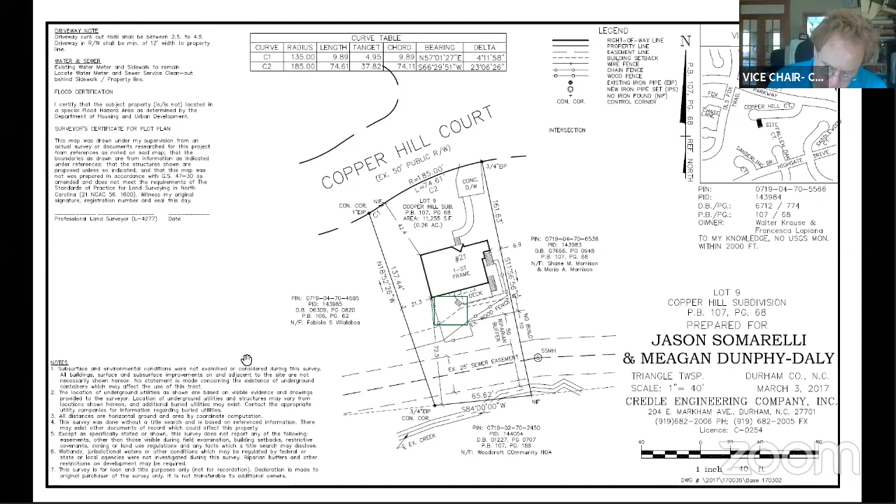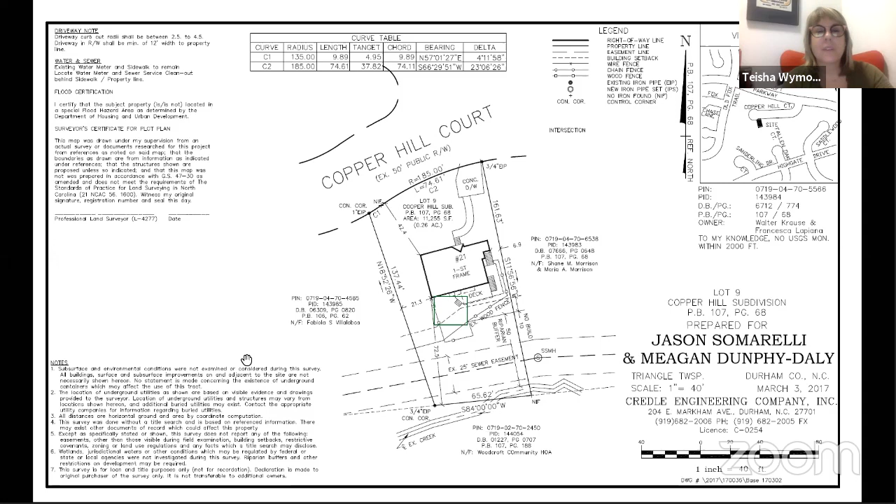We have a motion. Is there a second? Retchless second. All right, we have a second by Mr. Retchless. Susan, would you call the board? Mr. Kipp, yes. Mr. Meadows, yes. Ms. DeLacy, yes. Mr. Retchless, yes. Ms. Burnham, yes. Mr. Rogers, yes. Ms. Wymore, yes. Motion carries 7-0. By a vote of 7-0, your variance has been approved. Thank you for coming before the Board of Adjustment this morning. Thank you for your time. Madam Clerk, would you call the next case?

Case B20000007. A request for a variance from the street yard setback requirement for the addition of a covered porch onto an existing legal, non-conforming, single-family dwelling. The site is located at 4915 Montvale Drive, is zoned residential rural and in the rural tier. And this case has been advertised for the required period of time. Property owners within 600 feet have been notified, and notarized affidavits verifying the sign postings and letter mailings are on file.

All right. Well, we can go ahead and administer the oath. Is the applicant with us? Do we have video? Yes. All right. Let's go ahead and we'll administer the oath. Do you solemnly swear or affirm that your testimony and evidence shall be the truth, the whole truth, and nothing but the truth? I do. And do you consent to using this remote platform for this meeting? I do. And Eliza, would you like to take over? Staff wants to interject really quickly. Can you all hear me? Yes. Yes, there is someone that also signed up to speak here.

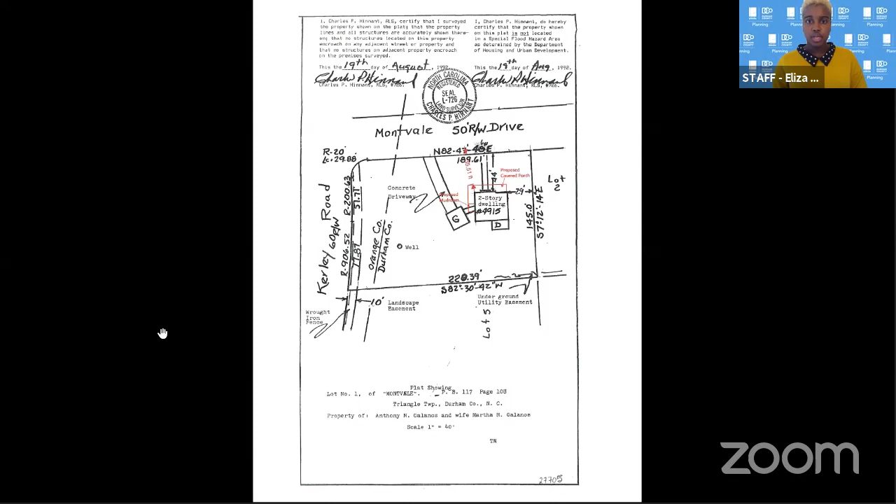Staff will be available for any questions as needed during the hearing process, and I will quickly scroll through a little bit. I have had this up so you all can see the proposed covered porch area in relation to the existing structure. And there are also some other attachments, including some elevations to show what the porch would look like. The existing main floor with the new covered porch and utility room, as well as a photo of the current existing porch, as well as the distance from the street with that.

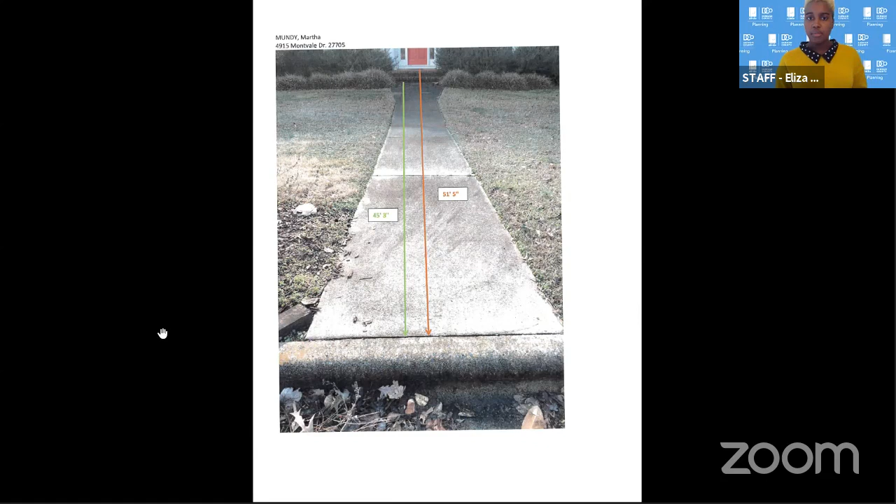So just wanted to quickly go through those, and they are available. We can go back to them as the board or the applicant or Mr. Gully requests. Thank you, Eliza. Are there any questions for Eliza from the board? All righty. Any hands raised? I didn't see any in my scan just then. All right. Would the applicant come forward?

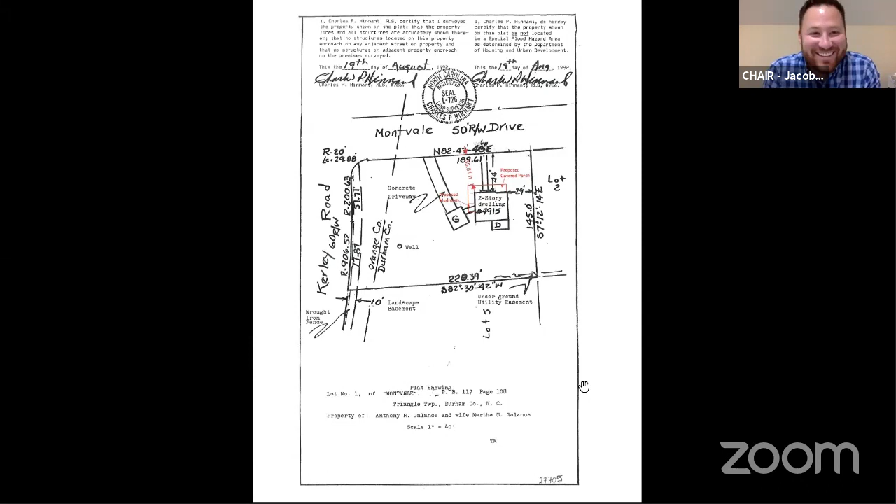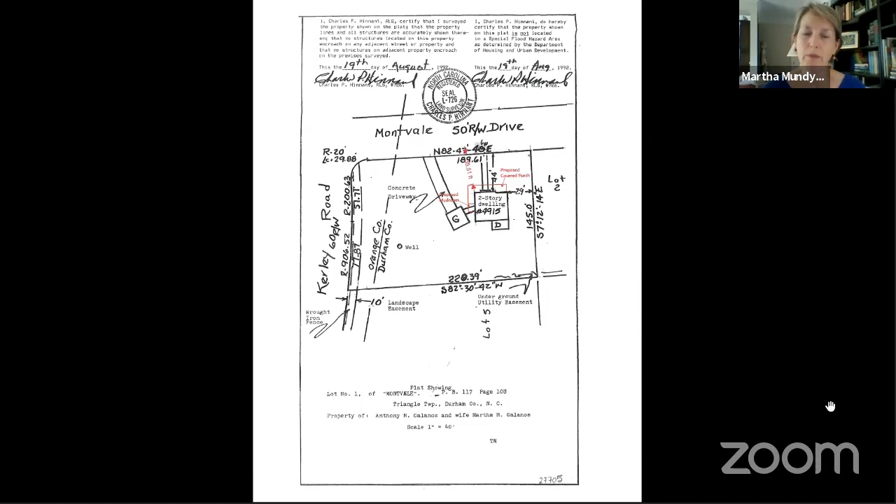Yes. I started talking about this about a year ago, wanting to do a front porch across the front of the property. And as well at the same time to move my current laundry room, which would be in the addition on the side between the house and the garage, with the possibility of moving a full bathroom downstairs, just trying to do what I might be able to do to stay in the property as long as possible. I moved into the property in 1992 with my ex-husband and children.

I was surprised. In our neighborhood, we have an architectural review committee. So once I had these plans drawn, submitted those and got approval, and then the contractor submitted the plan to the county, and of course we got the bad surprise. As Ms. Monroe mentioned, I'm not close to a 2-acre lot. It's one of the smaller ones in the neighborhood because I'm right off Kerley Road. There's really no way to build out.

I think that the covered front porch would not put me right on top of the street. I think there still would be plenty. That's a visual judgment. I don't have landscape architects to testify on my behalf. But I think that it's consistent with the neighborhood. All of the comments that I've heard from other neighbors have been positive. So it's my hope that I'll be able to sit on this lovely front porch and use my new mudroom soon. Thank you.

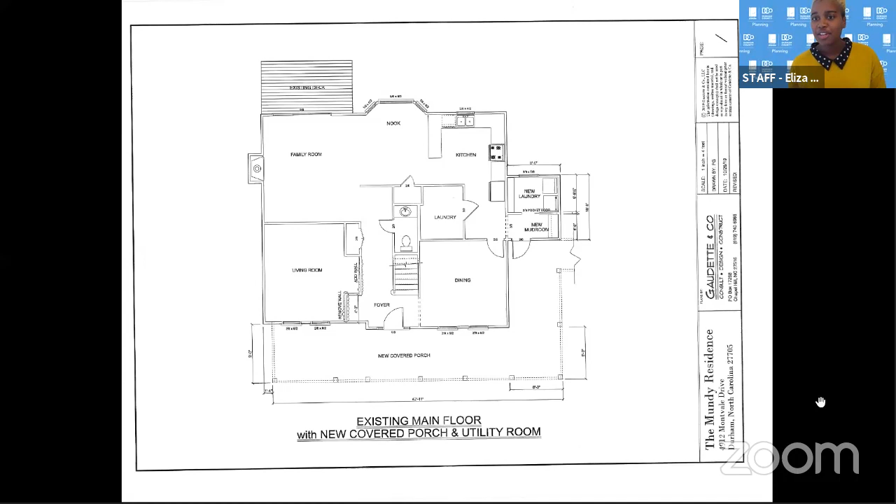All right. Well, Mr. Gulley. Sorry, there's a hand raised. Ms. Wymore does have her hand raised. Sorry. Yeah, sorry, I didn't do the official.

Real quick, is the garage, the detached garage, is that in existence now? Yes. I wasn't clear. Okay, and that will not be connected to this mudroom? It's separate completely already? It's separate right now. The garage is not in the same orientation, it's canted a little bit. But there is a covered pathway, a covered walkway between the garage and the house as it currently exists.

I think that there will still be a covered walkway from the door, exit from the garage to the house onto the porch. But that hasn't been drawn, where you might be able to see it on that landscape plan where you can see the orientation of the garage. Which one do you need me to pull up, Martha? Sorry. The one that's the landscape architect drawing from a long, long time ago, because it shows, that's it. There you can see the garage.

I'm sitting here moving my mouse like I have control.

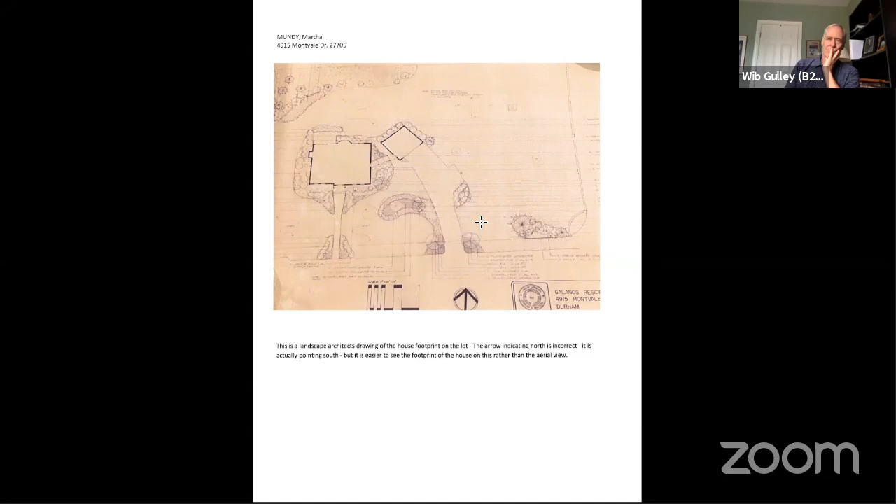But yes, there's a walkway between the garage and the house that is covered and is attached. The walkway's attached. Okay, thank you. Any other questions for the applicant? Mr. Retchless has his hand raised. All right, Mike.

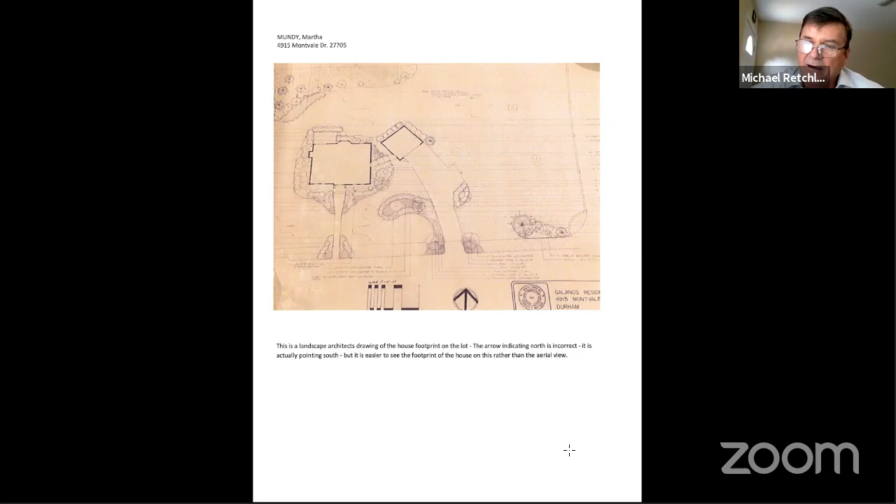Hi, Ms. Mundy. On the porch part of this structure, is that going to be just like a raised deck with pylons and a mansard roof kind of over it? Is that what you're proposing? Like a wood deck? I'm not sure what a mansard roof is. That's what you got. Oh, okay, thank you. Yes, a mansard roof, new vocabulary for me.

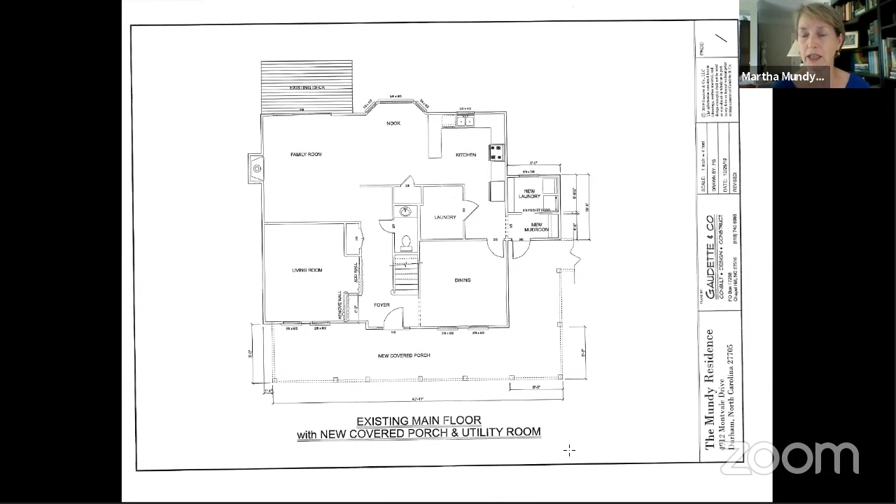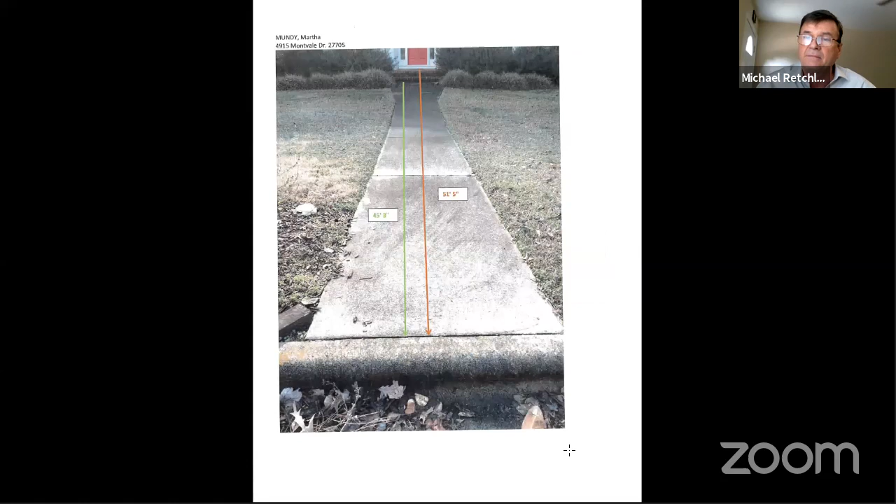The plan, what I had requested, was that it would be open, and the contractor said because of the height, because it's so close to the ground, my lot's pretty flat in the front, that it would be possible to do that. So more open. Yes, with landscaping in front of it. Gotcha. So that is like a wood deck is what we're talking about as far as your porch? Yes, yes. Any other questions for the applicant?

All right, well, Mr. Gulley, would you like to say a few words? I'd be glad to, Mr. Chairman. Do you want to swear me in? Oh, I did. You're good, Mr. Gulley. Good. All right. Thank you. Mr. Chairman, members of the board, it's good to be with you this morning, and I appreciate your all's time and attention to this and all the other cases that I've listened to this morning. I had the joy of serving on the board for a couple of years back last century, and it's good to be with you this morning.

I have been a resident of the Montvale neighborhood since 1993, along with my wife and kids. And I've served as chairman of the architectural committee for pretty much that whole time. It's a committee required under our restrictive covenants. Montvale, you all may know all this, but it's a 28 home subdivision with a relatively active homeowners association. And so I'm going to share some information, not technical evidence, but still information maybe that would be helpful to the board.

So I sent out an email a couple of weeks ago to everyone in the neighborhood. I left Martha off, but I sent it to everybody else. And I said, I'm planning to appear before the board and just share the fact that my wife and I support her. But if there's any objections or any questions or any concerns, would people please let me know, because I'd like to try and express that as well. I received no objections, no questions, no concerns.

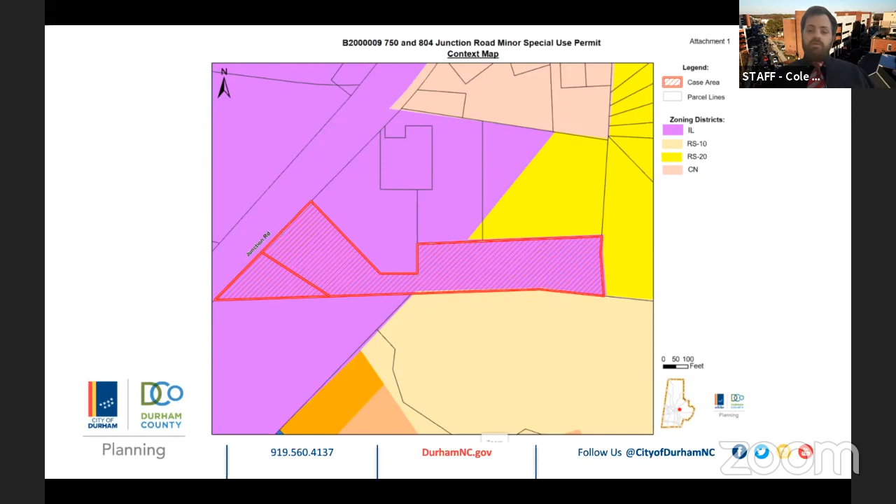The case area is highlighted in red. The site is in the suburban tier, zoned industrial light, and is within the city of Durham's jurisdiction. The site area is currently being used as a self-storage facility, as you can see right here in this area.

A fence greater than 4 feet in height located between the structure and the street, except as exempt by Unified Development Ordinance, Section 9.9.1B, requires approval through an MSUP by the Board of Adjustments pursuant to UDO Section 9.9.1, fences and walls height. This minor special use permit request is to allow the fence located in the street frontage of the lots to be taller than 4 feet. The applicant is requesting an 8-foot high chain link fence.

UDO 3.9.8A and B establish 4 findings and 13 review factors that the applicant must meet in order to grant a use permit. These findings and review factors are identified in the staff report and the applicant's responses to findings and review factors are identified in the application, both within your packet. Staff will be available for questions as needed during the hearing process. Thank you, Cole. Any questions for Cole?

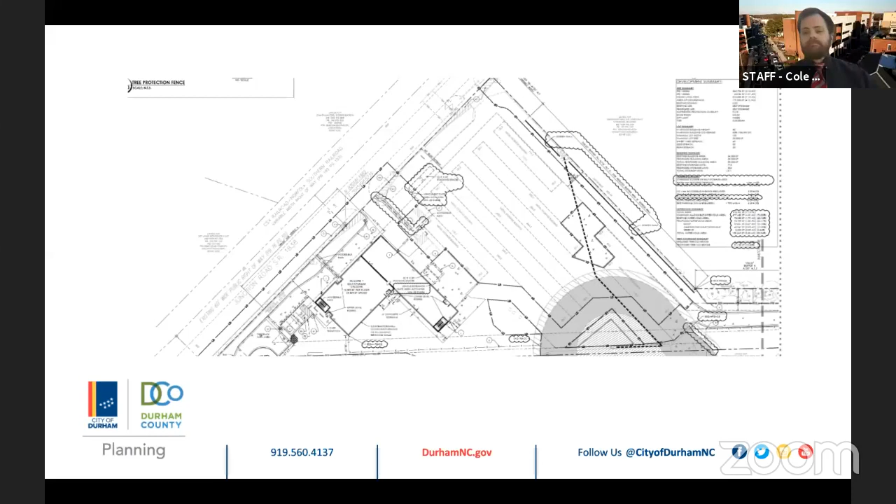Just to start off, Lynn, if you do need me to reference the site plan, let me know. I can pull that up for you. This is Chad. I'm sorry. I'm having a very hard time figuring out where the fence is. I think this site already has a fence, but some or all of it is coming down. There's new fence coming in, and I had a very hard time figuring out what's being proposed. Can you help me, Cole?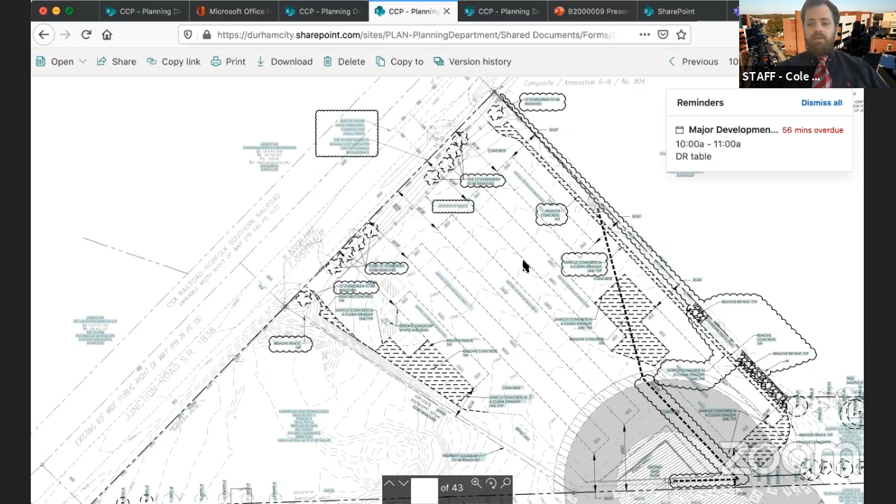I'm gonna let Lynn discuss that. I'll pull up the site plan so she can point it out. Here it is. Lynn, is there a certain page you'd like me to go to show this, or zoom in, or I think she has to be moved to panelist, or she's muted at the moment. Thank you. Sorry for that, trying to unmute. If you can pull up the first sheet of the site plan, 201, C201, and go. Sorry. Oops. I have to move my panel real quick, sorry. Site plan west. I'm trying to, it's just. I understand. It's taking a while to load.

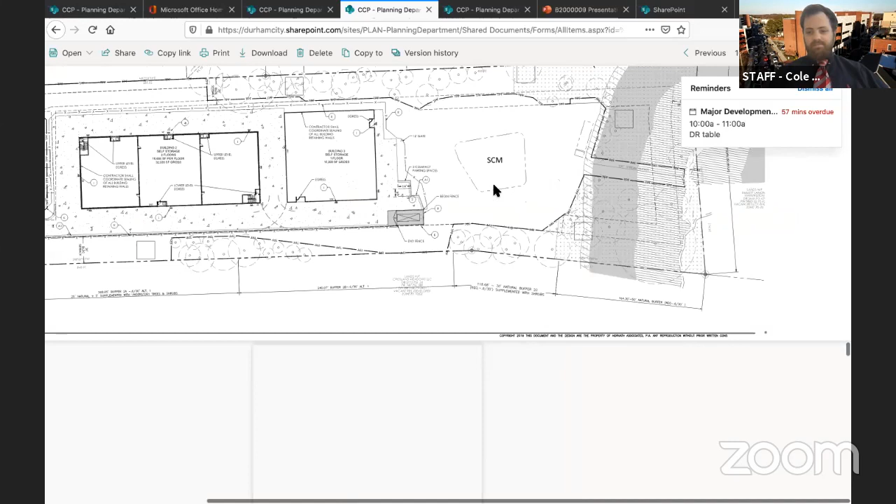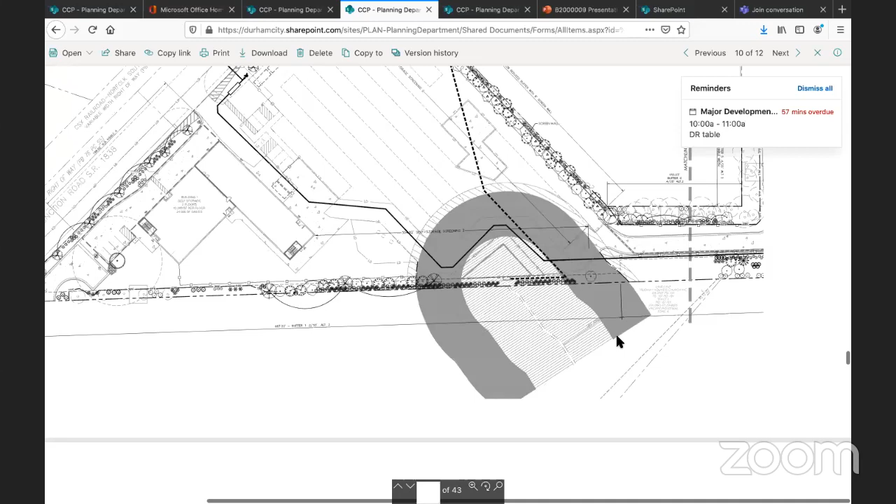Is this the correct sheet, Lynn? 201? Actually, that's the landscape plan. I think it would show a little better on the site plan, which is further up. This one. 101. There you go. Yeah, this is one. Yes. It's okay. Okay.

All right. So there is an existing fence that extends from the, I wish I could use a mouse, from the upper corner of the site down across the frontage. It follows the edge of that exactly and continues on across an existing driveway. It then turns and goes, if this were the existing conditions, it would terminate there and go back toward the

back of the property. This site plan is expanding the self-storage into a vacant lot down on the bottom far left. So what we will be doing is removing a portion of the fence that currently crosses the middle driveway and the fence that goes back toward the back of the property. And we will connect, well, if you could point just to the right of the proposed driveway, the other right, just above it. Anyway, the fence will connect to the existing fence before it reaches the driveway. And will run perpendicular to that fence down to a new gate that is down a little past mid-building.

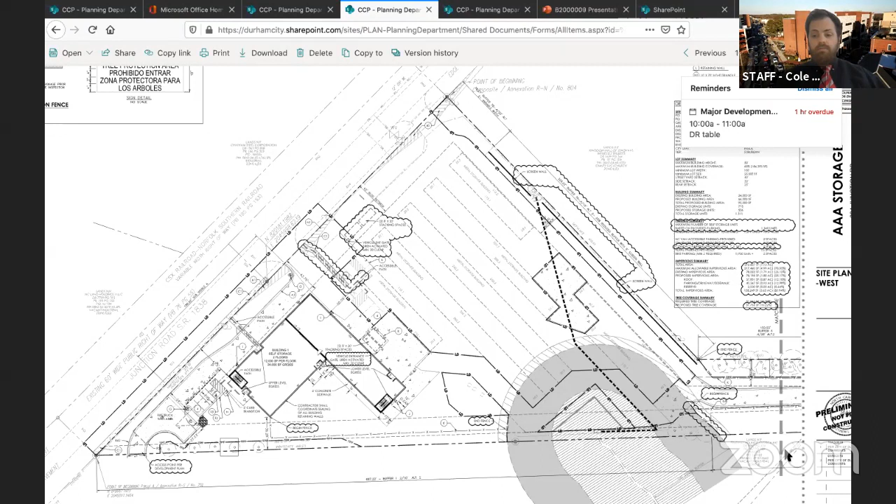That was my question, was what you're trying to help me through right now, which is what exactly is being proposed. It's kind of difficult to see how the fence, the fence that is the subject of the variance, what's going on. And I understand you're trying to answer that. So thank you. That was why my hand was raised.

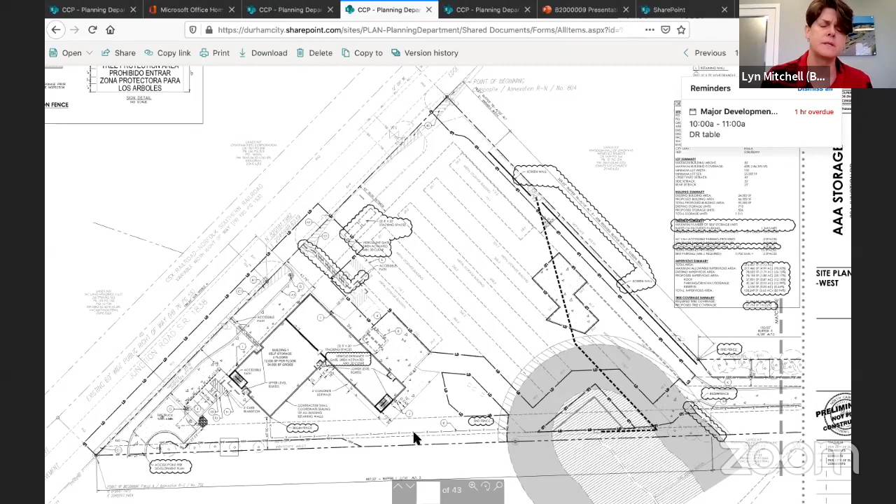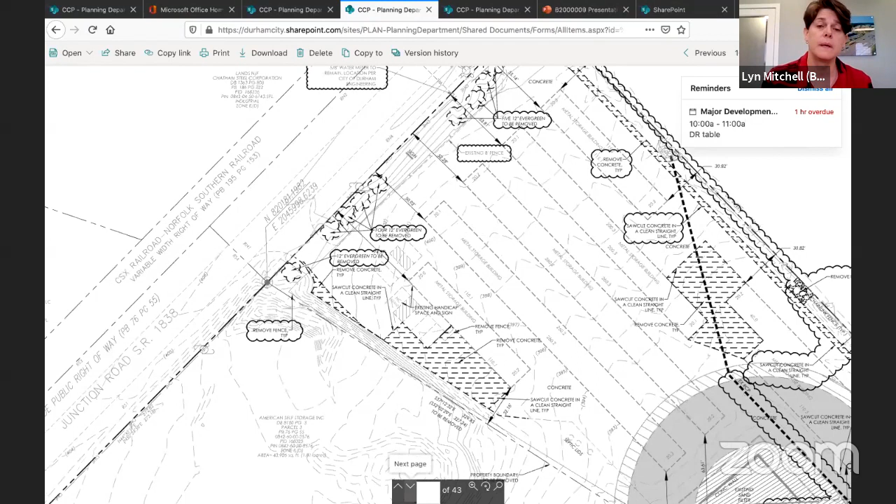Certainly, I think perhaps to clarify the portion of the fence that's in question, the existing fence is an 8-foot zinc coated chain link fence. And we will be connecting with an 8-foot zinc coated fence and running it perpendicular to the right of way for about 30 feet until we get back into our yard, into the site. But we are improving the traffic situation and access to the site while still providing some security for our client. Any other questions for staff, for Cole?

All righty. Lynn, I'm going to turn it over to you and you could tell us what's happening. Thank you. If you've got anything else. Yeah. Thank you. As we've already said, my name is Lyn Mitchell. I'm with Horvath Associates at 16 Consultant Place in Durham. I'm a registered landscape architect in the state of North Carolina. My license number is 2031.

Thank you to the staff for your assistance in coordination and preparing our petition. And Cole, you did a great job of presenting our request. And I thank you for the clarifying questions. So I'd like to only highlight a few specific items. This project is located on Junction Road south of Cheek Road. The site plan and associated special use permit application are for the expansion of the existing self-storage center.

The request in front of you today is for an 8-foot tall zinc coated chain link fence to be located in the 50-foot street frontage associated with the site plan. And as I said, that will be running perpendicular to the right of way. If you visited the site prior to this meeting, you likely noticed the existing 8-foot tall fence on the property running parallel to Junction Road. I realize we've said this previously, but I think it helps to explain it again.

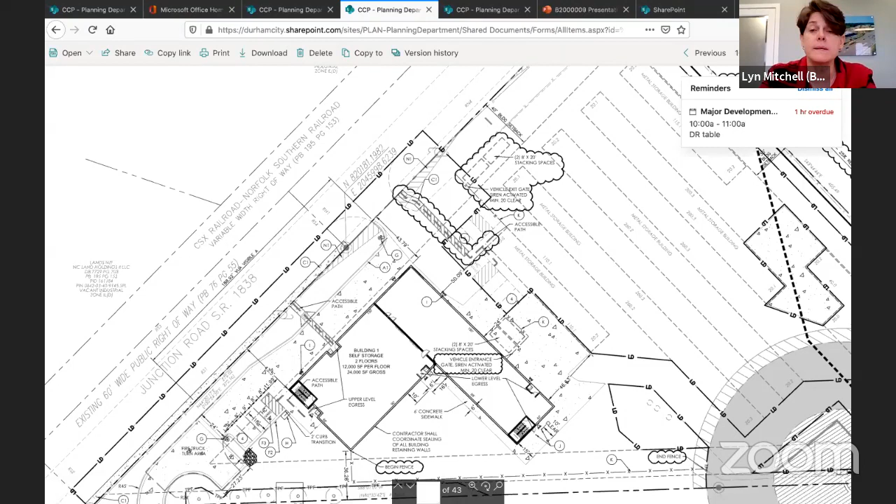The proposed fence will be an extension of a portion of the existing fence and will be used for security, while the site design and placement of the proposed fence allows better access onto and from Junction Road. Our site plan is improving access to and from Junction Road by relocating the existing gate at the central driveway further into the site and to allow both pedestrian and vehicular traffic to enter the site without needing access through a gate as it exists today.

The proposed gates will be siren activated to allow emergency vehicles immediate access to the facility in case of an emergency. Since the proposed fence will not be any closer to the right-of-way than the existing fence, and the majority of the parcels along the portion of Junction Road are industrial in nature, the expansion of the existing fence will not be injurious to the value of properties in the general vicinity. The proposed expansion of the fence will not adversely affect the health or safety of the public.

The proposed fence height will have no impact on the site's lighting, utilities, open space, or environmental protection of stream buffers and tree coverage areas. The proposed site plan illustrates project boundary buffers to help screen the new construction from adjacent parcels. The 8-foot fence will have minimal impact on surrounding properties and is compatible with the surrounding industrial zone properties.

And that is, in summary. I appreciate your time this morning, and I ask that you vote in favor of the expansion of this 8-foot tall chain link fence for security of the self-storage center while creating better vehicular and pedestrian flow in and out of the proposed development. I'm available for any questions. Any questions for the applicant?

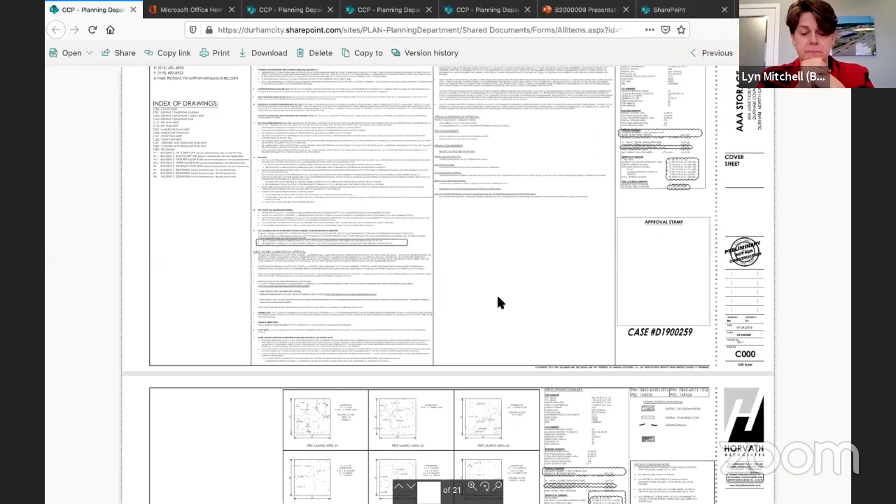Currently existing on the site on the frontage, there's 286 linear feet, including the 2 gates. 77 feet of that will be removed and then effectively pushed further into the site, and connected with a perpendicular. And actually we're moving it back 166 feet. And so it'll be 286 feet of 8-foot tall fence. Is that what you're asking? That's what's existing now. We'll be taking 77 of that away and turning it perpendicular. Right. Yes. Going inside. Yes, sir. Okay. All right. Any other questions for the applicant?

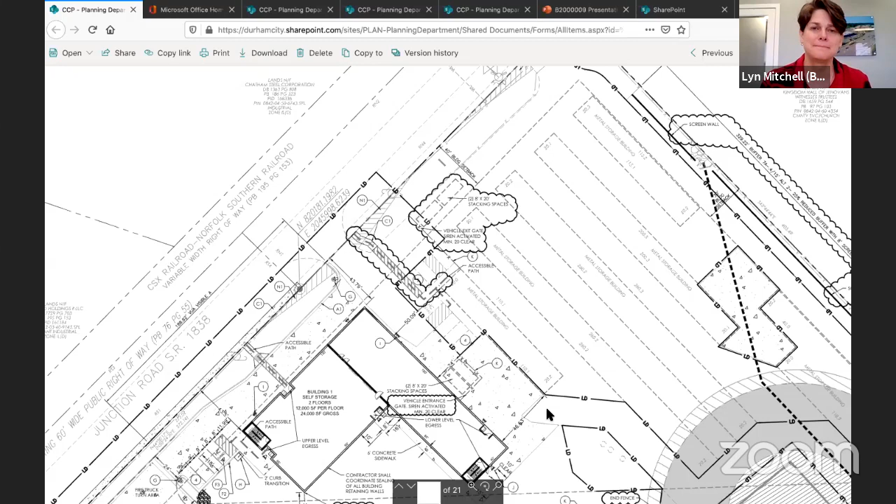Hi, Mike Retchless here. Ms. Mitchell, is there any concertina razor wire or anything like that going on this new fence? No, sir. Thank you. Any other questions, thoughts? All right. Well, I guess we can ask for the staff's recommendation. Before that, we would like to recognize Reggie Oakley, and I see he's there. Does he have anything to speak to for this case before we move on? Did not see that.

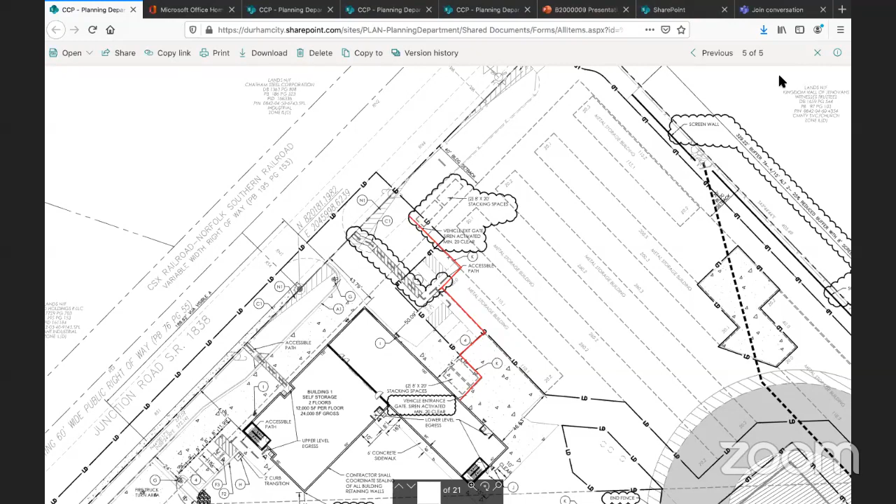Hi, this is Reggie Oakley. Are you able to hear me? Yes. Great. My name is Reggie Oakley. I'm a licensed commercial real estate broker. I work for Real Estate Associates. Sorry to interject. I don't believe he's been sworn in, so you probably want to do that first.

All right, Mr. Oakley, do you solemnly swear or affirm? Hold on, I don't have a video of him. There we go. Mr. Oakley, do you solemnly swear or affirm that your testimony and evidence shall be the truth, the whole truth, and nothing but the truth? I do. And just one more thing, do you consent to this electronic platform? Yeah. All righty. You may continue.

Any discussion, questions from board members? Ms. DeLacy? I believe Mr. Oakley said something about being a real estate appraiser. Did he have testimony on that? It sounded like he said commercial real estate broker. He's here in a support capacity with no prepared remarks, but is available for questions from the board. Okay. Any other thoughts, questions from board members for the applicant? Is there any discussion?

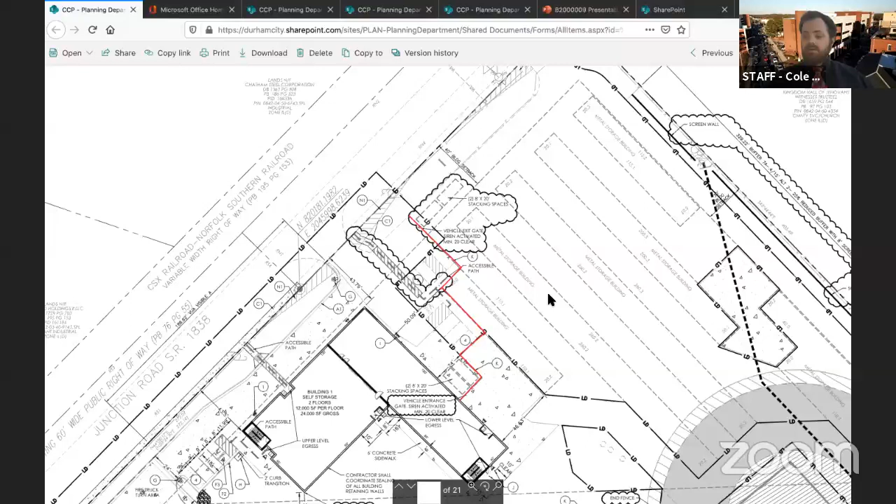Cole, would you like to give a staff recommendation? Yeah, staff recommends approval of case B2000009, so long as the permit shall be substantially consistent with the site plan D1900259 and all information submitted to the board as part of the application. I'm going to ask one more time. Is there any discussion, any thoughts from board members before we ask for a motion? Is there a motion?

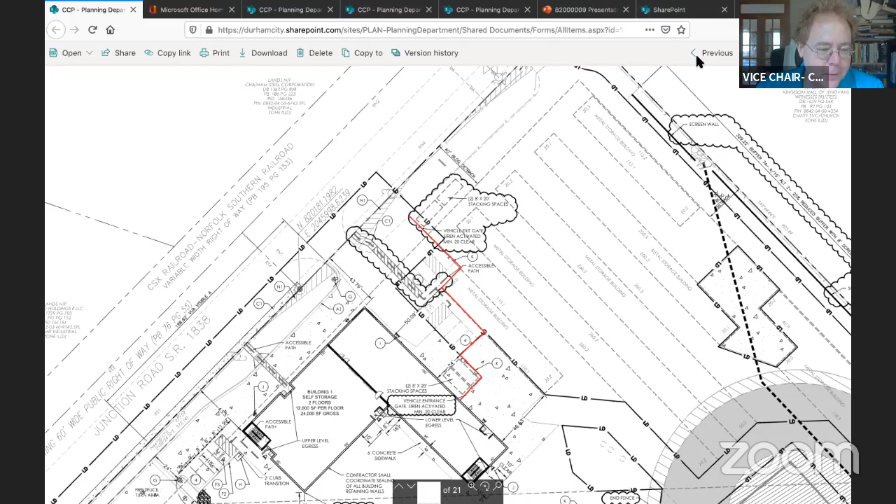It's me, Chad. I hereby make a motion that application number B2000009, an application for a minor special use permit on property located at 750 and 804 Junction Road, has successfully met the applicable requirements of the Unified Development Ordinance and is hereby granted subject to the following conditions. The improvements shall be substantially consistent with the site plan, case D1900259, and all information submitted to the board as part of the application.

Thank you, Mr. Meadows. Is there a second? Second. Retchless had the second. Okay, roll call. Mr. Meadows? Yes. Ms. Burnham? Yes. Mr. Kipp? Yes. Ms. DeLacy? Yes. Mr. Rogers? Yes. Ms. Wymore? Yes. Mr. Retchless? Yes. Motion carries 7-0. By a vote of 7-0, your minor special use permit has been approved. We wish you the best of luck and thank you for coming to the BOA. Thank you very much.

I believe we don't have any more cases. Do we have any old business? Any new business? Our next scheduled meeting is a week from today, June 30th at 8:30, same time. I think the agenda has already been sent out to everybody. Hopefully you've had a chance to look over that. It will be another virtual meeting.